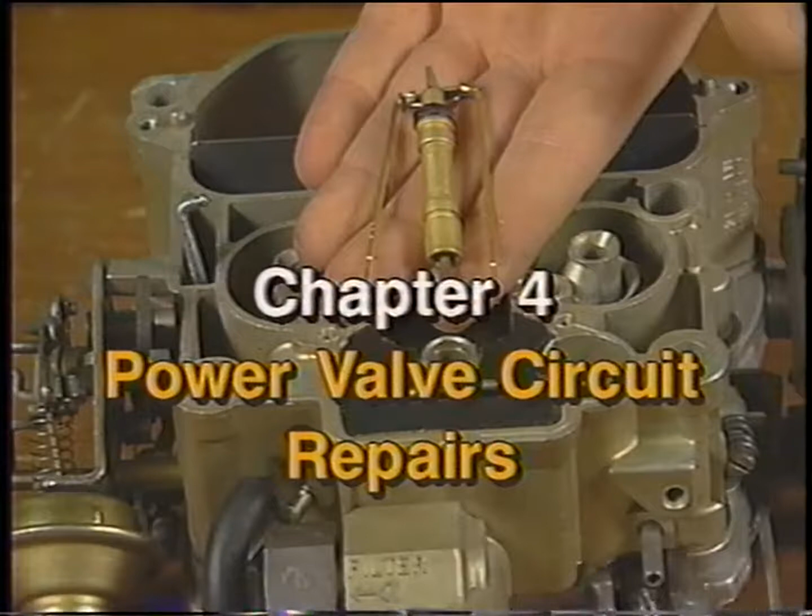Chapter 2 will begin our series of chapters that cover drivability or starting problems commonly encountered with carbureted engines, specifically choke pull-off testing and replacement. In Chapter 3, we'll look at inspecting the choke thermostat along with replacing and adjusting the two most common styles. Another carburetor part that can cause loss of power and fuel economy is the power valve circuit. Now during Chapter 4, we'll look at diagnosing power valve circuit failure and how to repair it.

In Chapter 5, we'll look at the carburetor circuit that allows you to take off from a stop sign, specifically the accelerator pump circuit. In the late 70s and early 80s, vehicle manufacturers began a decade of computerized carburetor controls, commonly referred to as feedback carburetors. The reason they were referred to that way is because they used a couple of sensors to feed information back to the onboard computer, and the onboard computer also controlled certain actuators contained in the carburetors.

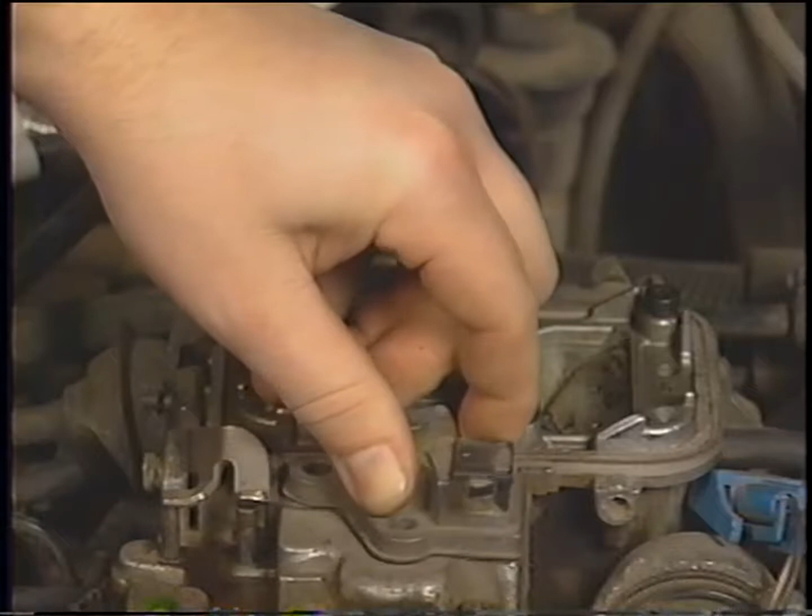One of the actuators used that was controlled by the onboard computer was the mixture control solenoid. In Chapters 6, 7, and 8, we'll explore testing, replacing, and adjusting mixture control solenoids. During Chapters 9 and 10, Jim Bates will join us to discuss testing and replacing throttle position sensors, which are common both to carbureted and fuel-injected vehicles.

The final chapter, in which we'll concentrate solely on carburetors, is Chapter 11, during which we'll completely disassemble a carburetor, rebuild it, and readjust it back to factory specifications. That pretty much wraps up the areas we'll be discussing on this tape, so now let's talk about the tools that we'll be using to perform the testing and replacement portions.

Now everybody pretty much realizes you'll need a good selection of basic hand tools to work on your vehicle. Some examples of that include combination wrenches, both metric and standard, a good selection of pliers including locking pliers and needle nose type, 1/4 inch drive and 3/8 drive shallow and deep well socket sets, again both metric and standard, a torque wrench, a hammer, some punches, and a rubber mallet, Phillips and flat blade screwdrivers,

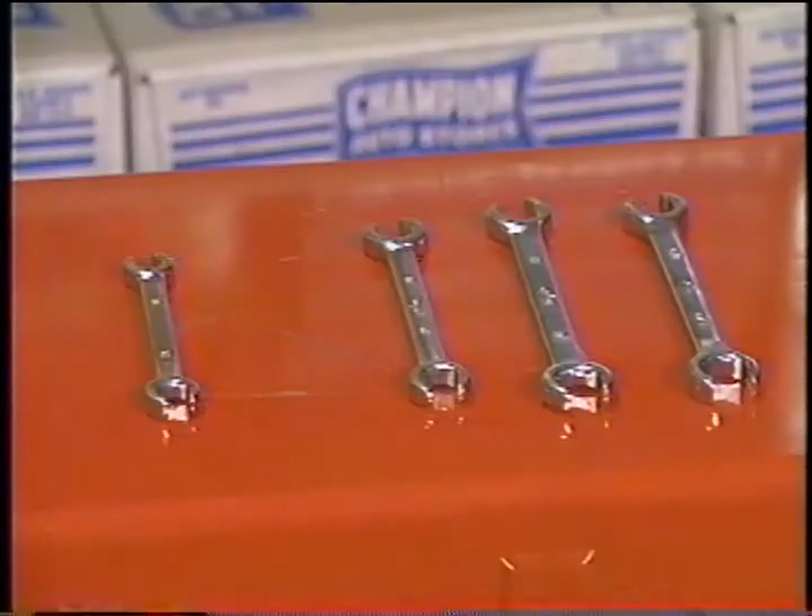one of my favorites, a magnetic screwdriver and a selection of bits, a pair of safety glasses, a set of metric and standard tubing wrenches, some shop towels and hand cleaner for cleaning up afterwards, and a drain pan, some funnels, and a gas can. You'll also need a few basic shop type chemicals, including thread lock adhesive, some carburetor parts cleaning solution, and a spray type carburetor cleaner.

Now let's look at some of the more specialized tools you may need. Torx bits are becoming a popular type of fastener for a lot of different items on today's vehicles. So you'll most likely need a set of Torx bits that I suggest you get from size 10 through size 50. For General Motors carbureted vehicles newer than 1980, you'll need some of these special tools for making fine-tuning adjustments either during a carburetor overhaul or even during an engine tune-up.

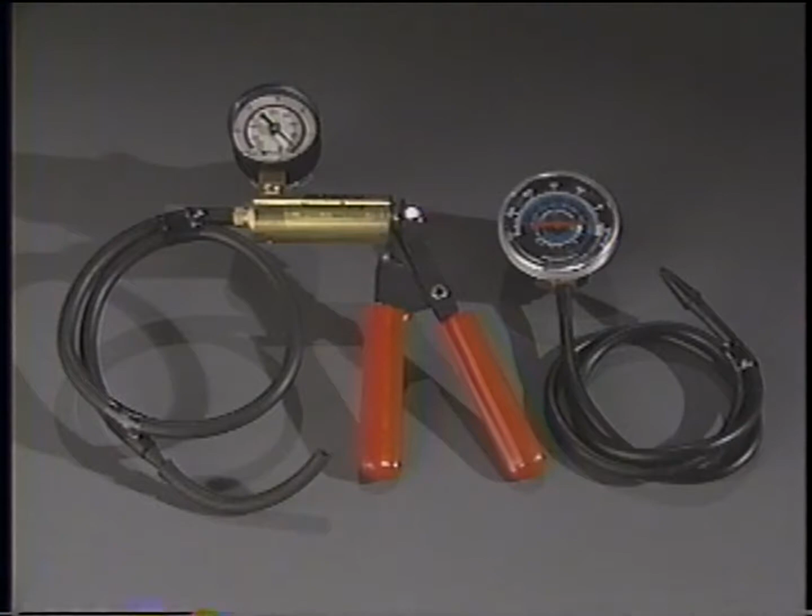Now another couple of common troubleshooting tools are a hand vacuum pump and a handheld vacuum pressure tester. We'll use those to check vacuum diaphragms and vacuum-related switches and relays. You'll also need a handheld digital volt ohm meter for testing the electrical circuits involved with your carburetor and a tach dwell meter for final carburetor adjustments. A digital multimeter like this one has all of those options built right into it. It's also a good idea to have around some jumper or test leads.

And one of the most important items any mechanic has to have is the correct service manual for the particular vehicle they're working on. One of the best you can buy is a Haynes manual, because they deal specifically with the disassembly and reassembly of your particular car. From specifications to detailed instructions and illustrations, you'll find just about everything you need to know about your vehicle in one of these. Well, that pretty much wraps up our tool selection.

Now the topics demonstrated on this tape are typical examples of carburetor repair procedures being performed on common vehicles.

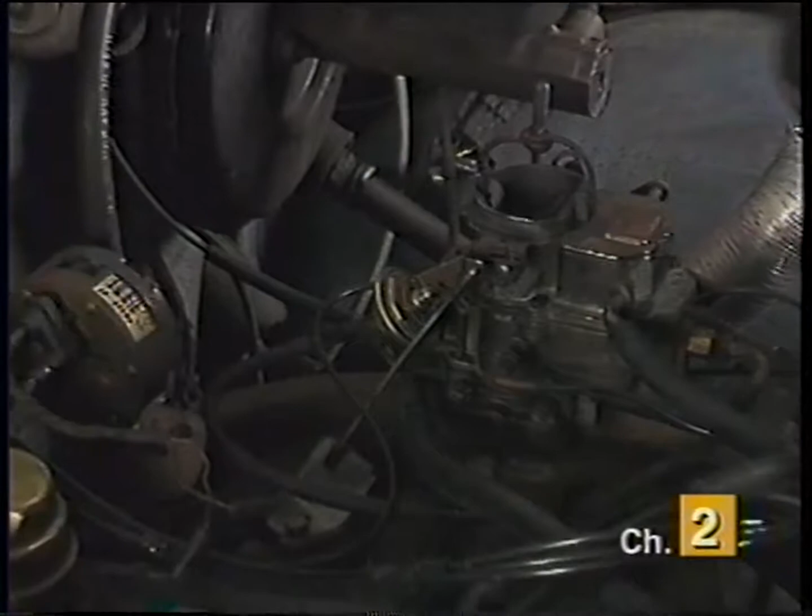They are located underneath the air cleaner, on the side of the carburetor, and are connected to the choke blade via linkage on one end, and on the other end there will be a vacuum hose attached. Its duty is to slightly open the choke blade on initial engine startup to prevent an over-rich fuel condition. Symptoms of a choke pull-off that has failed include an engine that starts and immediately stalls, rough engine operation right after initial startup, and black smoke from the tailpipe during cold engine operation.

On the other hand, a misadjusted choke pull-off, one that opens the choke blade too far after initial startup, would cause engine stalling when cold, and a hesitation on acceleration during the engine warm-up period.

If you suspect your choke pull-off is not working, the first step is to perform a visual inspection to make sure the vacuum hose is connected and in good condition, and to be sure the linkage between the pull-off and the choke blade are actually connected. If both areas appear all right, then start the engine and watch for movement of the pull-off. No movement indicates a defective pull-off.

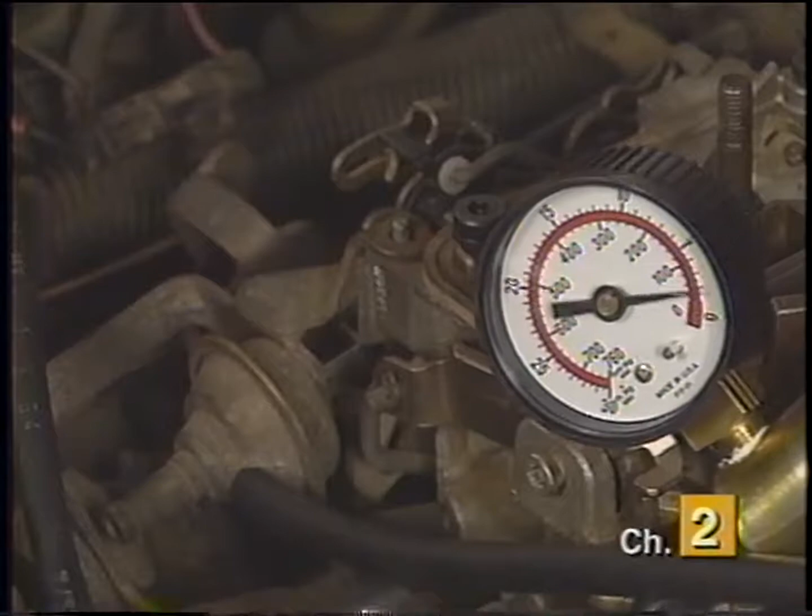Another method for testing and adjusting a choke pull-off is to use a handheld vacuum pump. Simply connect the hand vacuum pump to the choke pull-off and apply 20 inches of vacuum. Once again, the pull-off should move and hold vacuum. If the hand vacuum pump does not hold vacuum and the pull-off does not move, replace the pull-off. Some pull-offs have a small bleed hole on the backside that must be covered with a piece of tape or your finger during testing.

To replace your choke pull-off, you will need a magnetic screwdriver, a needle nose pliers, and a Haynes manual for your particular vehicle. First, you'll need to remove the air cleaner to access the pull-off. Make sure to mark or note the location of any hose connections that lead to it before disconnecting them. Next, remove the mounting screws from the old pull-off. This is when the magnetic screwdriver comes in handy.

Carefully remove the pull-off while disconnecting it from the linkage. Take your time so as not to disturb or bend any linkages during removal. Many choke pull-offs have a bracket that must be transferred to the new part. Remove the pull-off from the bracket if so equipped. When purchasing a new choke pull-off, it is often a good idea to have the serial number from the carburetor or the old one along with you. Compare the old and new pull-off to be sure of correct replacement.

If the old pull-off was earlier removed from a bracket, install the new pull-off to the old bracket. Install the new one in reverse order of removal by carefully connecting the linkage and reinstalling the mounting screws. Tighten the mounting screws securely. Lastly, make sure you check the adjustment once it is installed.

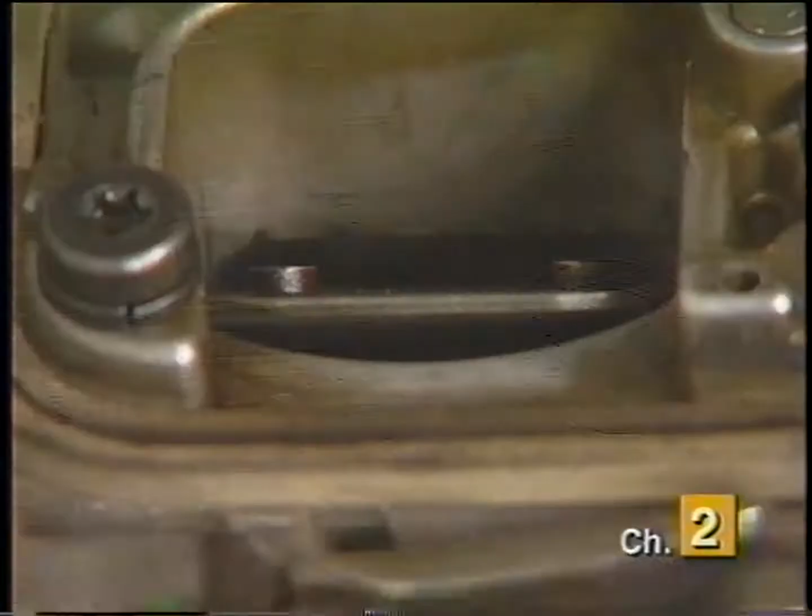To do so, connect up a hand vacuum pump, and with light finger pressure on the choke blade, apply vacuum to the choke pull-off. With a drill bit of the appropriate size, measure the opening distance between the choke blade and housing. Generally, there should be between 1/8 and 3/16 of an inch gap. But make sure you check a Haynes manual for the correct specification on your vehicle.

If it is not within specifications, reset it by turning the adjustment screw or by putting a slight bend in the linkage. Reinstall the air cleaner and reconnect any hoses removed earlier. Once adjusted, start the engine to be sure of proper operation.

Now let's briefly recap the steps for testing and replacing a choke pull-off. First, remove the air cleaner and inspect the vacuum hose and connecting linkages. If damage or deterioration is found, perform necessary repairs before continuing. Then start the engine or connect a hand vacuum pump and apply 20 inches of vacuum. Watch for movement of the diaphragm. If no movement is noticed, replace it. If you're performing the test with a hand vacuum pump, check for a bleed hole that may have to be covered during the procedure.

To replace a choke pull-off, disconnect the vacuum hose and remove the mounting screws. Carefully disconnect the linkage while removing the pull-off from the carburetor. Compare the old and new parts to be sure of proper replacement. In some cases, you may have to change a bracket from the old one to the new one. Position the new pull-off onto the carburetor while carefully reconnecting the linkage to it. Reinstall and tighten the mounting screws and vacuum line. Check and adjust the pull-off as per the instructions detailed in a Haynes manual.

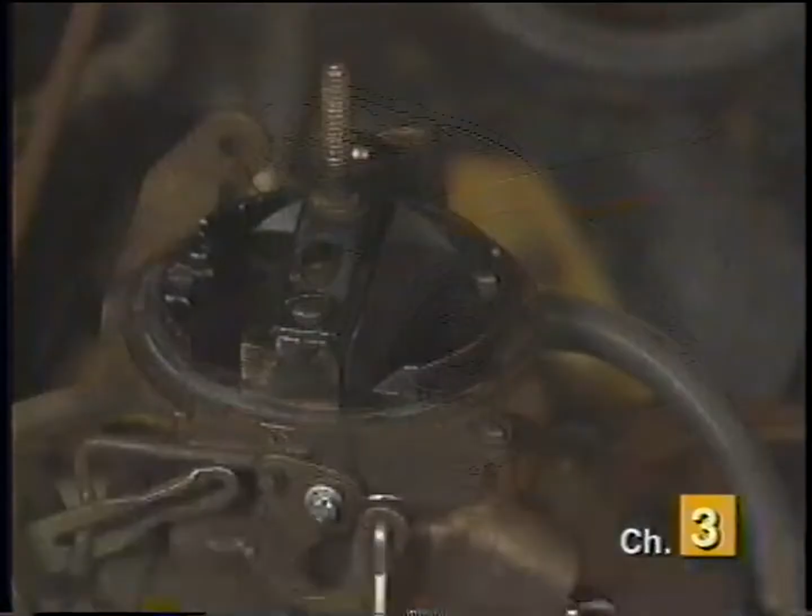Choke thermostats can fail in two different manners. The most common manner is when the bimetal spring inside the thermostat becomes weak and will not totally close the choke blade during cold weather. Symptoms of this type of failure include hard starting when cold, or engine stumbles or stalls upon acceleration during the engine warm-up period.

The other manner in which a choke thermostat can fail is when it fails to totally open the choke after the engine is fully warm. This can cause sluggish engine performance, poor fuel economy, black smoke out the tailpipe, or even failure to pass a state emissions test.

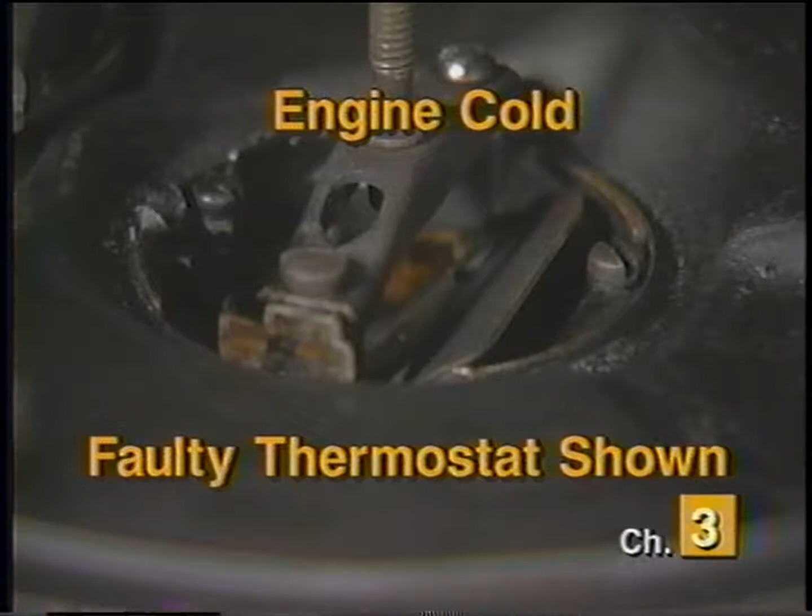To check your choke thermostat, remove the air cleaner and snap the throttle. If the outside air temperature is less than 50 degrees and the engine has not been run in the last 5 or more hours, the choke blade should snap all the way closed.

The other test requires you to run the engine until it is at full operating temperature. This will usually take about 10 minutes or 5 to 8 miles of highway driving. With the engine shut off and the air filter cover removed, check to make sure the choke blade is totally open.

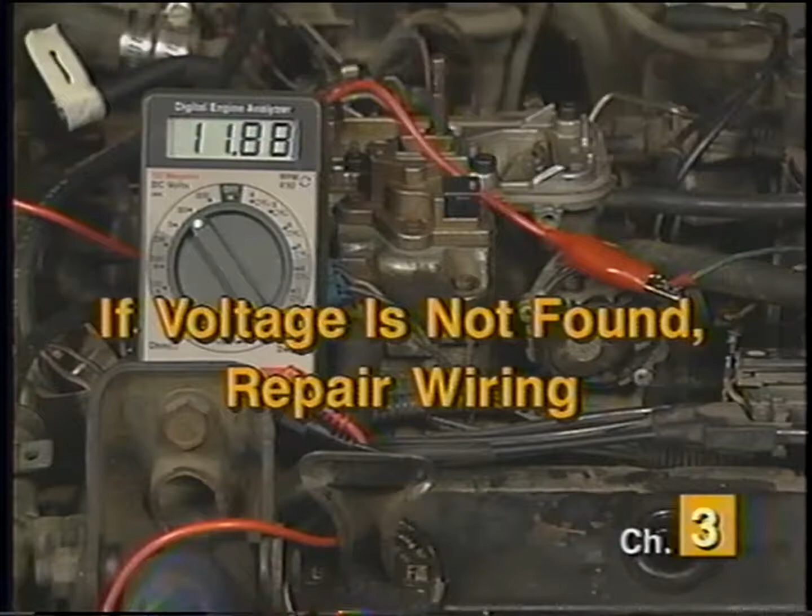If yours is electrically assisted, test to make sure you have power at the electrical connector. With the ignition key in the run position and with the engine cold, disconnect the electrical connector at the thermostat and in its place, connect a voltmeter. Most vehicles require 8 volts or above for proper choke thermostat operation. If voltage is not present at this wire, check for open circuits and repair the electrical wiring before replacing the choke thermostat.

The items you may need to replace your choke thermostat include a Phillips or large flat blade screwdriver, a needle nose pliers, a 3/8 drive socket set, and a Haynes manual for your particular vehicle. In most cases, you will have to remove the air cleaner to gain access to the choke thermostat.

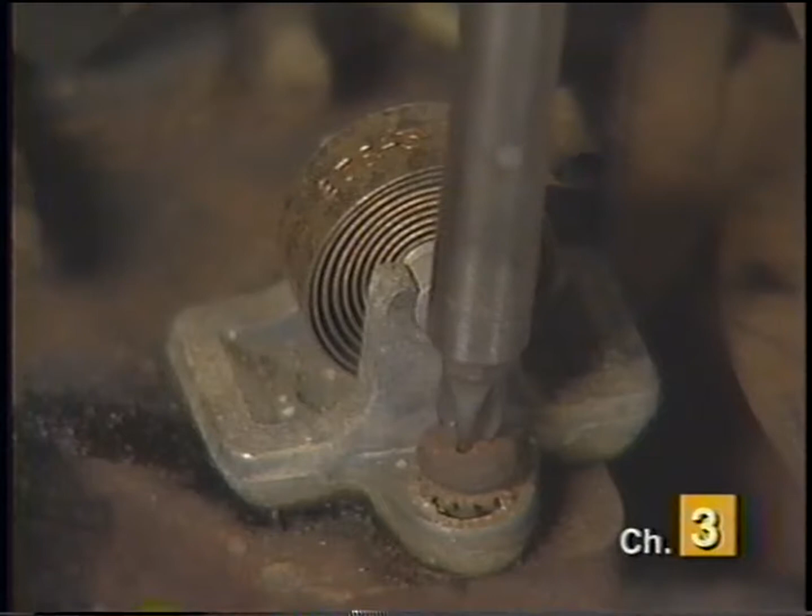To replace a divorced choke, first disconnect the linkage rod from the carburetor. Now remove the choke thermostat cover or stove if so equipped, and remove the linkage rod from the thermostat. Remove the mounting screw or bolt and remove the choke thermostat from its mounting position. Compare the new and old thermostats to be sure of proper replacement.

Set the new thermostat in position and start the bolt by hand to prevent cross-threading. Tighten the bolt securely once installed. Reattach the linkage rod to the choke thermostat and reinstall the thermostat cover or stove. Reconnect the linkage to the carburetor and reinstall the linkage clip. Move the throttle and check to make sure there isn't any interference or binding of linkages. Reinstall the air cleaner housing and you're done.

To replace an integral style choke, once again you will have to remove the air cleaner assembly. Note the routing and attachment points of any hoses connected to the air cleaner. Place a small mark on the graduated scale of the choke housing as to the position of the thermostat you are removing. If so equipped, disconnect the electrical connection from the terminal on the outside of the choke.

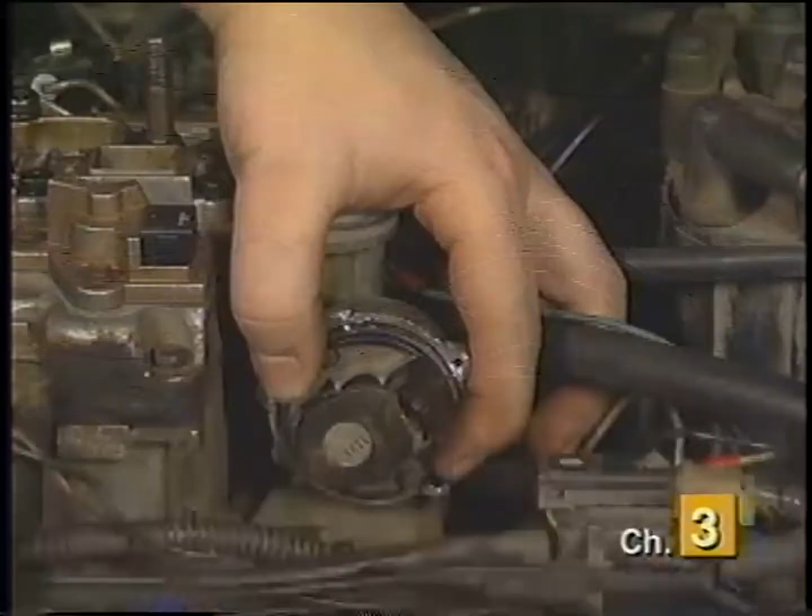Remove the small screws that secure the choke thermostat in place. Be careful not to drop or lose the small retaining clips. A magnetic screwdriver comes in handy if they are metal screws and clips. With the screws removed, you can grasp, twist, and remove the thermostat from the carburetor. Once again, compare the new and old thermostat to be sure of correct installation.

Position the new choke thermostat on the housing, making sure to engage the tab on the thermostat with the notch in the choke linkage. Once positioned, move the thermostat back and forth several times while watching the choke blade. If correctly installed, the choke blade should move freely along with the movement of the thermostat. Then, reinstall the retaining screws and ring or clips and gently snug them up. Don't fully tighten them at this point.

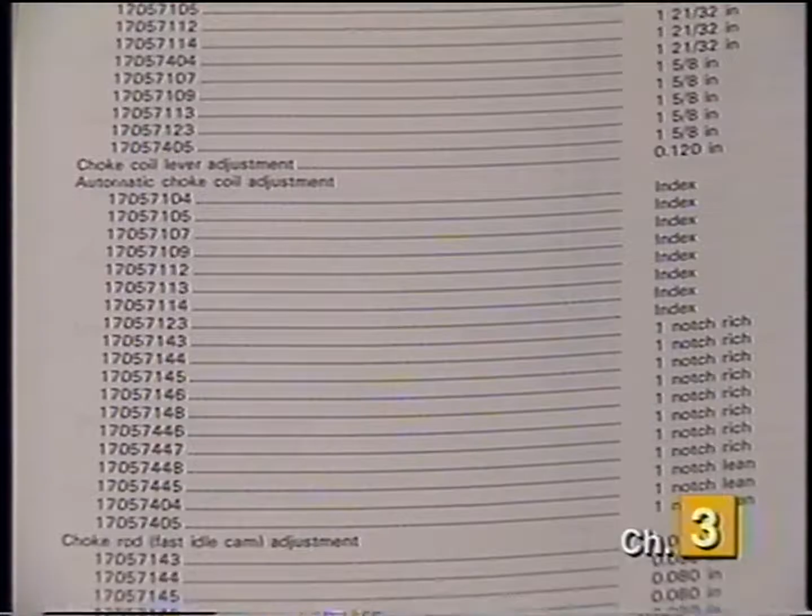Consult a Haynes manual for the correct adjustment specification on your vehicle. Adjust the line on the thermostat to the correct position on the scale of the choke housing. Once adjusted, fully tighten the retaining screws. Then, reconnect the electrical connector to the thermostat. Reinstall the air cleaner, and start the vehicle to test the choke for proper operation.

Let's recap the steps involved for testing and replacing your choke thermostat. To test your choke thermostat for correct cold operation, the engine must not have been run for about 5 hours, and the outside temperature must be less than 50 degrees. Remove the air cleaner cover and snap the throttle. The choke plate should fully close. If not, replace the choke thermostat.

The other test requires you to run the engine until it is at full operating temperature. Shut the engine off and once again remove the air cleaner cover. The choke blade at the top of the air horn should be fully open. If your choke thermostat is electrically assisted, check for voltage at the feed wire with the ignition switch in the run position. Most vehicles require 8 volts or above at the wire for this proper operation. If voltage is not present at this wire, repair the electrical circuit before replacing the choke thermostat.

To replace your choke thermostat, in most cases you will have to remove the air cleaner. On divorced chokes, remove the choke stove if so equipped, and remove the mounting screw or bolt that attaches the thermostat to the manifold. Then remove the linkage from where it attaches to the carburetor. Compare the new and old units to be sure of the correct replacement.

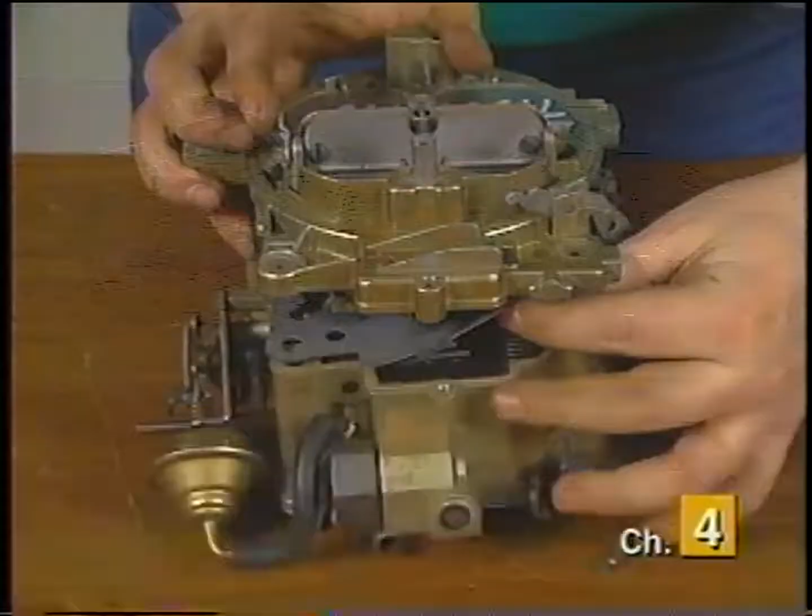To cure this problem, you must remove the air horn from the carburetor. Remove the air horn gasket and pop the power piston and metering rods up and out of their position. Be sure not to disturb or lose the small spring that sits below the power valve piston. Clean the outside of the power piston and metering rods with carburetor cleaner to remove varnish. Also, be sure to clean the piston well at the same time.

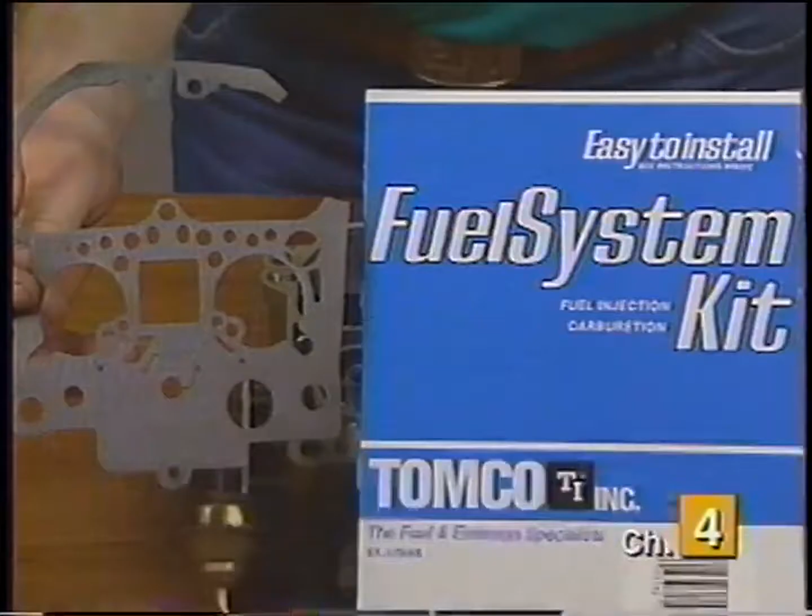Since partial carb disassembly is required to access this style of power piston, and internal varnish deposits have been found, we suggest rebuilding the carburetor at this time. You will also probably damage the air horn gasket, which can only be purchased in a complete carburetor kit. For a complete demonstration of those procedures, view our chapter on carburetor rebuilding.

On Ford and Holley carburetors that utilize a diaphragm type of power valve, failure symptoms would include poor fuel economy, sluggish engine performance due to a rich fuel mixture, and even black smoke out the tailpipe. A power valve failure of this type can often be attributed to an engine backfire. This style can be replaced without complete disassembly of the carburetor. On many Holley carburetors, the power valve is located inside the fuel bowl in the main metering block.

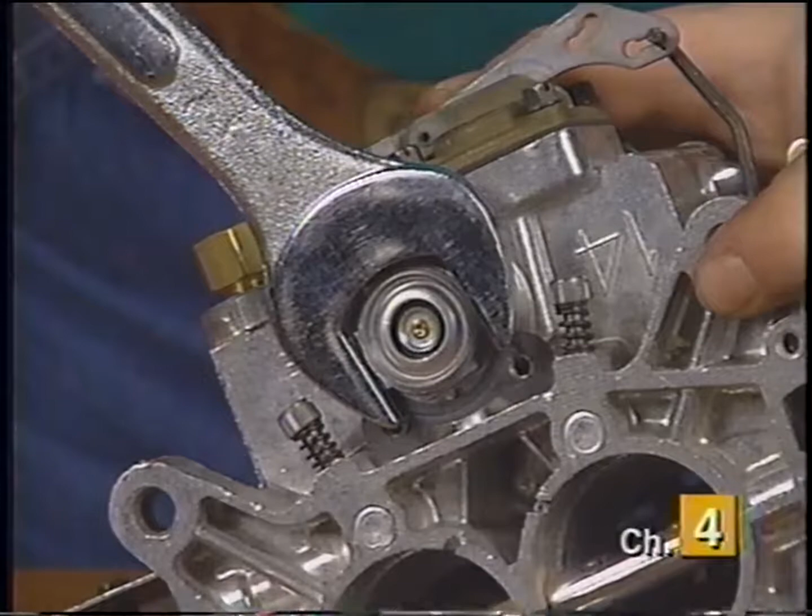On Ford vehicles, where carburetor removal is necessary, invert the carb over a funnel and gas can to drain the fuel out of it before disassembly. Then locate and remove the screws retaining the power valve cover. Fuel deposits inside the cover are an indication of a power valve diaphragm rupture. With the cover removed, you can use a large, about 1-inch wrench to loosen and remove the power valve.

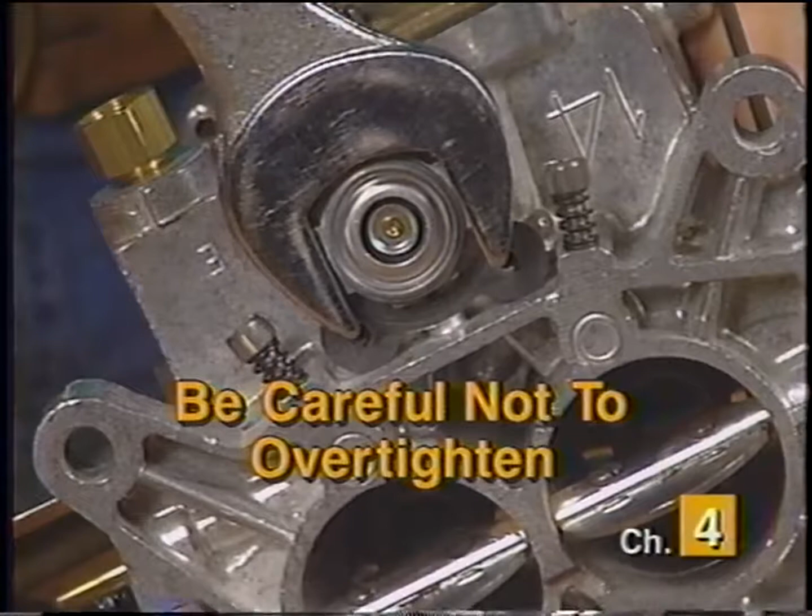Compare the new and old power valves to be sure of correct replacement. On Holley Performance carburetors, there will be a small 2- or 3-digit number stamped into the hex of the power valve. Make sure the number on the old one matches the number stamped into the new one. Position the new gasket on the new power valve and start it in the threads by hand to prevent cross-threading. Snug the power valve in place with the wrench, but be careful not to over-tighten it, as it is quite easy to do with a wrench that large.

Then reposition the power valve cover and install the cover retaining screws. Snug them up with a screwdriver once all of them have been started in the threads. Reinstall the carburetor on the vehicle and test drive to be sure of correct diagnosis.

Now let's review servicing or replacing the power valve. Servicing your power valve system, if it utilizes a power piston and metering rods, commonly found on Rochester, Carter, and many import applications, requires you to partially disassemble the carburetor. Because damage to some of the gaskets will occur during this procedure that can only be obtained in a carburetor overhaul kit, we suggest rebuilding the carb at this time.

With the power piston and metering rods removed, clean any varnish or deposits from them, as well as the piston well inside the carburetor. Once clean, reinstall the power piston and check for free operation. Reassemble the carb in the reverse order of disassembly, making sure to replace any gaskets that may have been damaged.

On many Ford and Holley carburetors, a diaphragm type of power valve is used and can be replaced without complete carburetor disassembly. On the Holley type, the float bowl will have to be removed, and on the Ford type, a small cover and 4 retaining screws will have to be removed. Use an appropriate wrench on the hex part of the power valve to remove it.

Install the new power valve and gasket, being careful not to over-tighten it with the large wrench. Reinstall the float bowl or cover and tighten the screws appropriately. Start the vehicle and test drive it for proper operation.

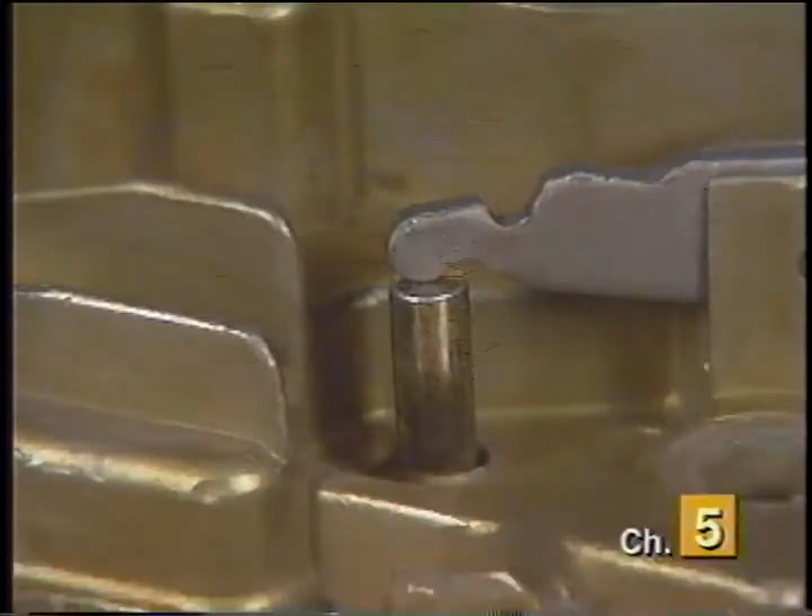The accelerator pump circuit in your carburetor adds an extra shot of fuel each time you step on the gas pedal to bridge the fuel delivery gap between idle and cruising RPMs. The accelerator pump itself is located internally or externally on the carburetor and is operated via linkage connected to the throttle plates.

Symptoms of a failing accelerator pump include a hesitation during acceleration from a stop sign after the engine is fully warmed up, a hesitation during acceleration when attempting to enter a freeway or while passing another vehicle, or even an external gas leak near the carburetor.

Before condemning the accelerator pump as your problem, make sure the entire ignition system, spark plugs, distributor cap and rotor, and spark plug wires are all in good operating condition, and check the ignition timing to be sure it is adjusted to the correct specification. If the engine is in good tune, you may then consider replacing the accelerator pump.

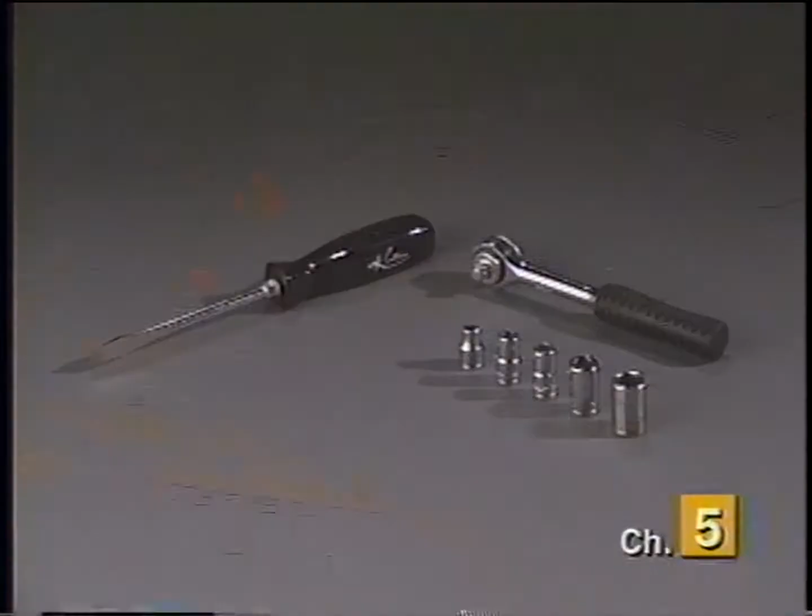The only tools you will need to replace an externally mounted accelerator pump is a screwdriver or 1/4-inch drive socket set. Externally mounted accelerator pumps are commonly found on Ford and Holley carburetors. To replace this style of accelerator pump, you may or may not have to remove the carburetor from the vehicle. For our demonstration, we chose to have the carburetor already removed.

First, if you are going to completely remove the pump cover and the accelerator pump linkage has more than one possible position, mark its location before disconnecting the linkage. Remove the 4 screws retaining the accelerator pump cover to the carburetor and position the cover aside and out of your way. Then, with the aid of a screwdriver, remove the old accelerator pump diaphragm and spring.

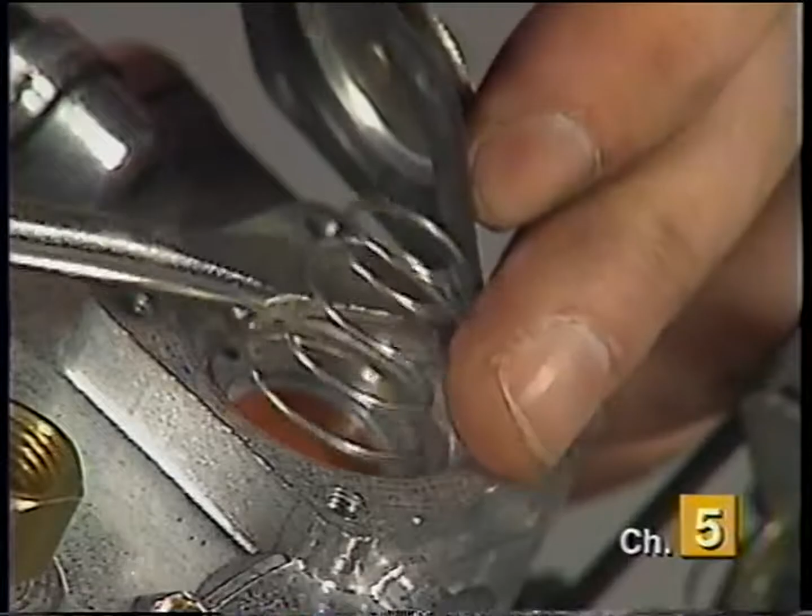If it is equipped with a rubber pump check valve, inspect it for damage, as a pump check valve can create similar drivability problems as would a bad pump diaphragm. If check valve damage is noticed, you will have to rebuild the entire carburetor, as that is the only way to purchase this item. If the check valve appears okay, reinstall the new pump and spring.

Be sure the pump is positioned in the same direction as the old one was removed from. Reconnect the linkage to the pump cover and start all pump cover screws by hand to avoid cross-threading. Tighten all the mounting screws securely.

On Rochester, Carter, and other styles of carburetors with internal accelerator pumps, you must partially disassemble the carburetor to access the pump. During disassembly, you will most likely damage some of the gaskets, so you will need to purchase a carburetor overhaul kit to obtain the accelerator pump cup and gaskets necessary. For a complete demonstration of carburetor removal and rebuilding procedures, review our video chapter on carburetor rebuilding.

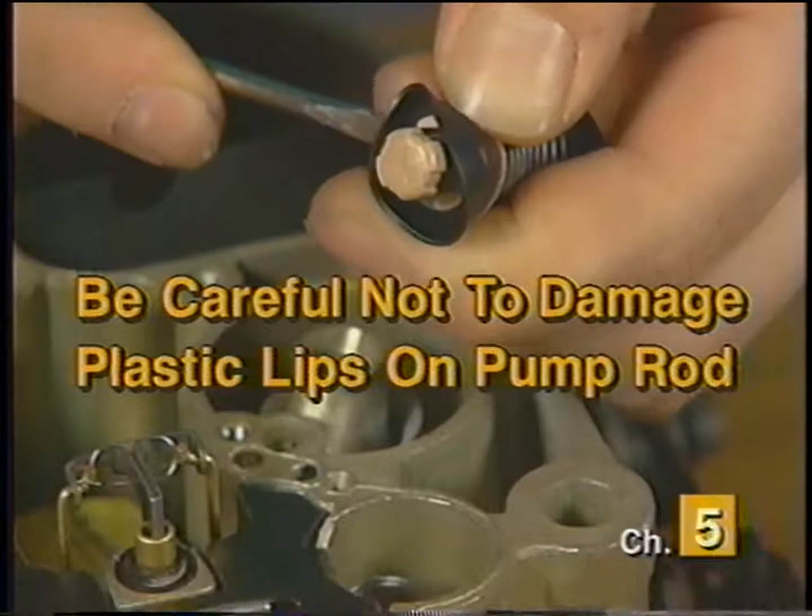The actual accelerator pump is a small rubber cup that is mounted onto the accelerator pump shaft. With the spring removed, you can work the rubber cup off from the shaft. Use care when removing the cup from the old shaft, as the plastic lips that hold the cup in position are quite fragile. Reposition the new cup in the same direction as the old one. That's all it takes to replace your accelerator pump.

Now let's review the steps for replacing your accelerator pump. On some Ford and Holley carburetors, the accelerator pump is located on the outside of the float bowl, and disassembly of the carburetor is not necessary. Simply remove the 4 screws retaining the accelerator pump cover and remove the pump and cover from the float bowl. Position the new pump on the cover in the same direction as the old one, position the accelerator pump spring, and reinstall the cover and retaining screws.

On Rochester, Carter, and many import carburetors, replacing the accelerator pump will require partial carburetor disassembly. Because damage to some of the gaskets may occur during the process, we suggest obtaining a carburetor kit and replace gaskets as needed. Once the carburetor is partially disassembled, you can remove the accelerator pump and plunger from the pump well. With a small screwdriver, remove the accelerator pump cup from the plunger.

Some will have a clip and spring that will have to be removed, while others will be held in place with a round garter spring. Install the new pump cup in the same direction as the old one. Reinstall the accelerator pump in the pump well, and reassemble the carburetor in the reverse order of disassembly.

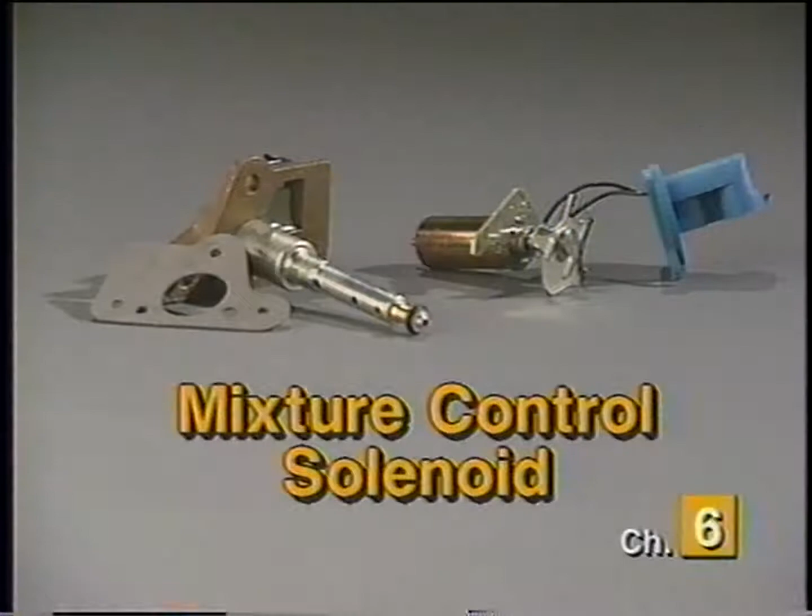The mixture control solenoid is an electrical device used on computerized carbureted vehicles that controls fuel flow from the main bowl of the carburetor to the main well, along with controlling an idle air bleed circuit. Symptoms of a failing mixture control solenoid would include a sudden drop in fuel economy or hesitation on acceleration. To test a mixture control solenoid, you will need a small, flat-bladed screwdriver, a hand vacuum pump, a jumper lead, and a digital volt-ohmmeter. To prevent burns, always start with a cool engine.

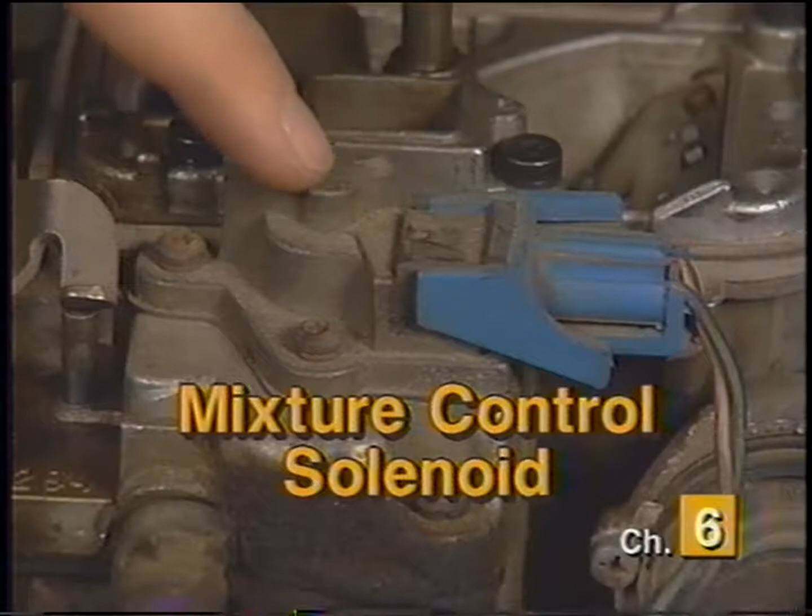Label and disconnect any hoses attached to the air cleaner assembly and remove the air cleaner from the engine. The mixture control solenoid will be located inside the carburetor. During our demonstration, we will be working on a General Motors vehicle. The first test is to simply listen for the MC solenoid to cycle. Turn the ignition switch to the run position. On many models, you should begin to hear a clicking sound as the mixture control solenoid cycles. If a clicking noise is heard, the electrical part of the solenoid is okay.

If no sound is heard, turn the ignition switch off. Ground the diagnostic terminals of the ALDL connector. For a complete demonstration of grounding the ALDL connector, refer to our onboard computer troubleshooting tape. Once again, turn the ignition switch to the run position. The solenoid should begin cycling. If no clicking is heard from the solenoid, replace it.

Next, use a small flat-bladed screwdriver to release the lock tab and disconnect the electrical connector from the solenoid. Connect the leads of your ohmmeter to the terminals of the MC solenoid. Polarity is not important. Set the ohmmeter to the low ohm scale. You should see a reading between 20 and 50 ohms. If the reading is within specifications, the problem is most likely in the wiring harness or the computer itself. If the reading is not within specifications, replace the MC solenoid.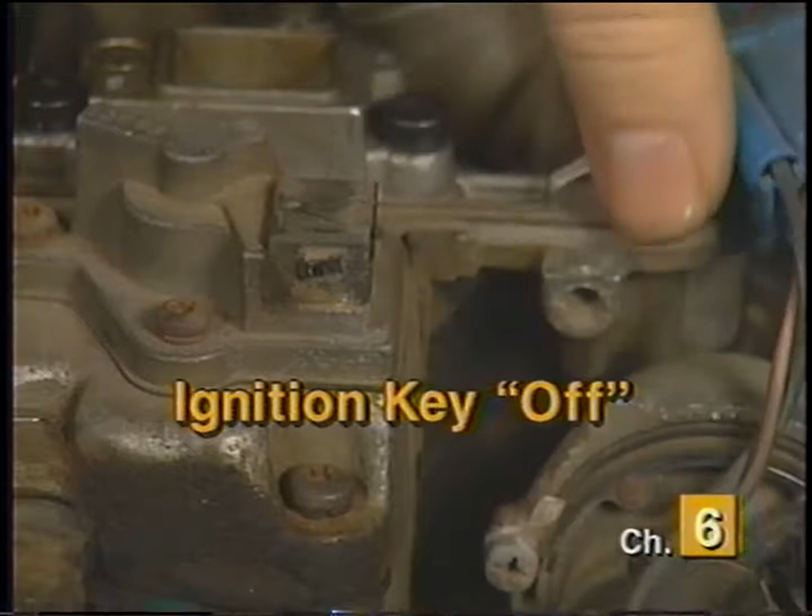If you have a General Motors vehicle with an externally removable MC solenoid, as shown, there is an additional test that can be performed. With the ignition key off, disconnect the electrical connection from the MC solenoid. Remove the solenoid from the carburetor and inspect the seals for damage. Replace any seals that are swollen or damaged. Reconnect the electrical connector to the solenoid. Connect a hand vacuum pump to the end of the solenoid with a piece of vacuum hose that will fit snugly over the rubber seal or stem.

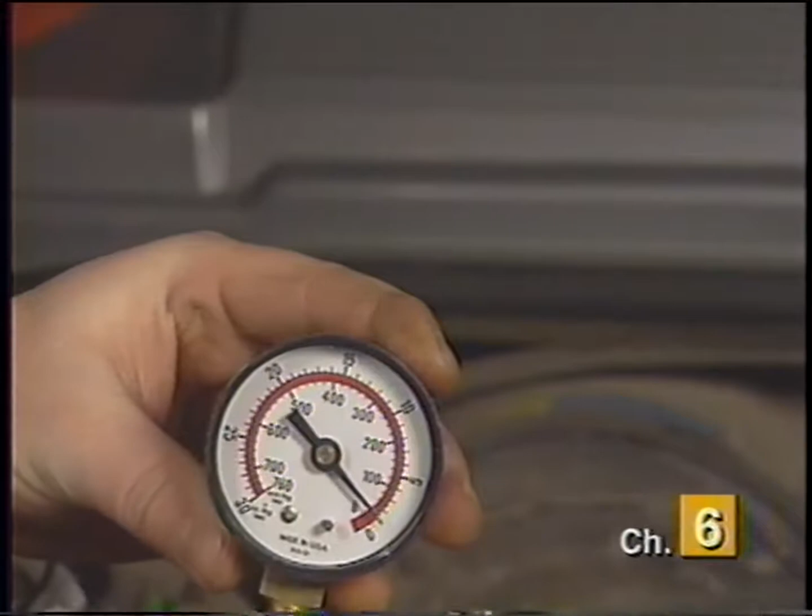Using a test lead, ground the Kelly green connector. This is the terminal normally used to check MC solenoid dwell. Turn the ignition switch to the run position, but do not start the engine. This will energize the solenoid in the lean position. With the hand vacuum pump, apply 5 inches of vacuum to the solenoid. The vacuum should hold for at least 5 seconds. If it will not hold vacuum, as in our demonstration, replace the solenoid. If it will hold 5 inches of vacuum for 5 seconds, that part of the solenoid is okay.

Then, disconnect the ground lead from the Kelly green connector. The vacuum gauge reading should go to 0 instantly. If it does not, replace the solenoid. To test it for restrictions, apply a rapid hand vacuum pump action several times. Wait a couple of seconds in between strokes. The gauge should move slightly, then return to 0 before the next rapid stroke. If the gauge does not return to 0 between these rapid strokes, the fuel feed orifice is restricted and the solenoid should be replaced.

The mixture control solenoid is the electrical equivalent to the power valve circuit on non-feedback carburetors. Let's recap the testing procedures just performed. First, ground the ALDL connector and turn the ignition key to the run position. Listen for the MC solenoid to begin cycling. If no sound is heard, test the winding resistance of the solenoid with an ohm meter.

Set the meter to the low ohm scale, and with the electrical junction disconnected, the resistance between the two terminals of the solenoid should fall between 20 and 50 ohms. If not, replace it. If it is an externally accessible solenoid, you can remove it from the carburetor and visually inspect it for damaged seals.

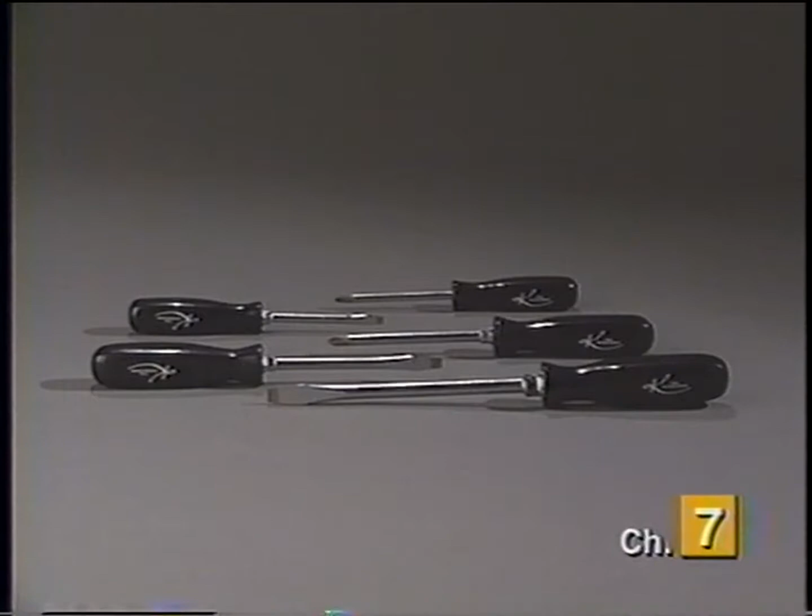To install an externally mounted solenoid, the tools you will need include a set of screwdrivers and the correct MC solenoid and gasket for your vehicle. To prevent burns, always start repairs on a cool engine. Because gasoline and gas vapor is very flammable, there are some important precautions to remember when working on the fuel system. Always work in a well-ventilated area.

Do not smoke while doing fuel system repairs. Keep open flames, sparks, or bare bulbs away from the work area. Do not work in an area with a gas appliance equipped with a pilot light. And have a fire extinguisher of the proper rating close at hand. First, make sure all accessories, including the ignition key, are turned off. Label and remove any hose connections to the air filter housing, and remove the air filter housing from the engine.

Now, locate the mixture control solenoid on top of the carburetor. Unplug the 2-wire harness from the solenoid. A small, flat blade screwdriver may be useful to release the locking tabs. Remove the screws attaching the solenoid to the carburetor, and remove the MC solenoid by pulling up with a slight twisting motion. Compare the old solenoid to the new one to ensure proper replacement.

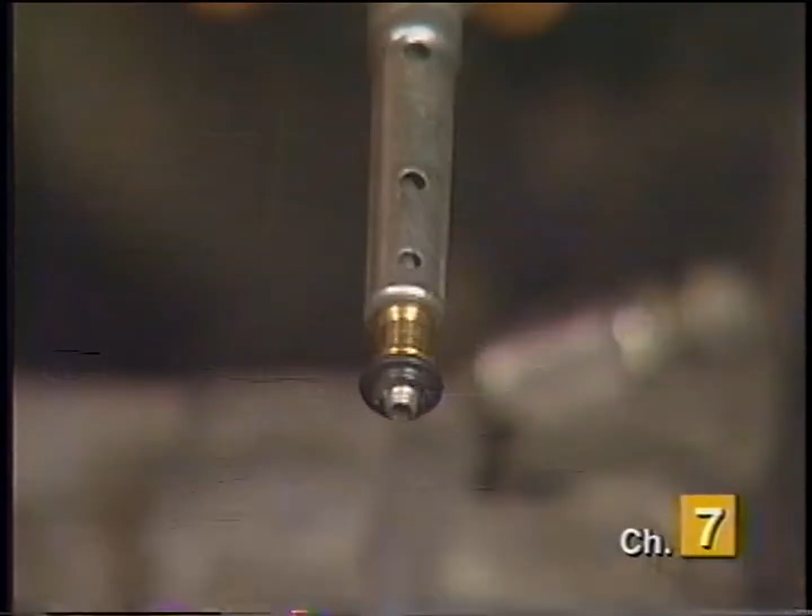If the old gasket is still on the carburetor, remove it, making sure the mounting surface is clean. Then, position the new gasket on the carburetor. Put a small dab of clean engine oil on the rubber O-ring at the bottom of the new MC solenoid. This will allow it to slip into place easier and help prevent damage to the O-ring. Now, carefully install the MC solenoid by pressing down with a slight twisting motion to help the O-ring slip into place.

Reinstall the mounting screws and reattach the wire harness. Reinstall the air cleaner assembly and reconnect any hoses or wires earlier removed. Test drive the vehicle for proper operation and you are done.

To replace an externally mounted mixture control solenoid on a GM vehicle, first turn off all the accessories including the ignition key. Remove the air cleaner. Unplug the 2-wire harness from the solenoid. Remove the mounting screws and remove the solenoid from the carburetor by gently pulling up with a slight twisting motion. Compare the new and old solenoids to be sure of correct replacement.

Place a dab of clean engine oil on the O-rings of the new solenoid. Now carefully install the new solenoid in the carburetor using downward pressure and a slight twisting motion. Reinstall the mounting screws and tighten to the proper torque specifications. Reattach the wiring harness. Reinstall the air cleaner and reconnect any hoses disconnected earlier. Lastly, test drive the vehicle for correct operation.

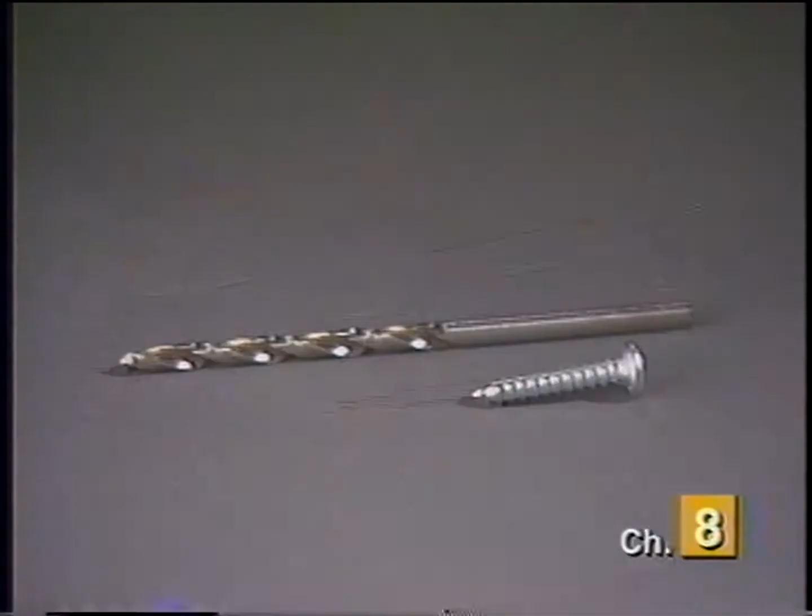To install and adjust an internally mounted mixture control solenoid on a General Motors carburetor, you will need a magnetic screwdriver and assorted bits, a digital volt ohm meter, a carburetor gauge set, a mixture control adjusting tool, an idle mixture adjusting tool, an idle mixture seal plug removal tool, a small pin punch and a ball peen hammer, a 1/8 inch drill bit, a number 8 sheet metal screw, a pair of locking pliers, the appropriate carburetor gasket set, a small tube of thread locking compound, and the correct mixture control solenoid for your application.

To prevent burns, always begin repairs on a cool engine. Because gasoline and gas vapors are extremely flammable, there are some important precautions to remember whenever working on any part of the fuel system.

Do not work in an area with a gas heater equipped with a pilot light without having adequate ventilation. Even if there isn't a gas heater with a pilot light, still make sure to work in a well-ventilated area. Don't smoke when performing fuel system repairs. Keep open flames, sparks, and unprotected light bulbs away from the immediate work area. And most importantly, have a fire extinguisher close at hand.

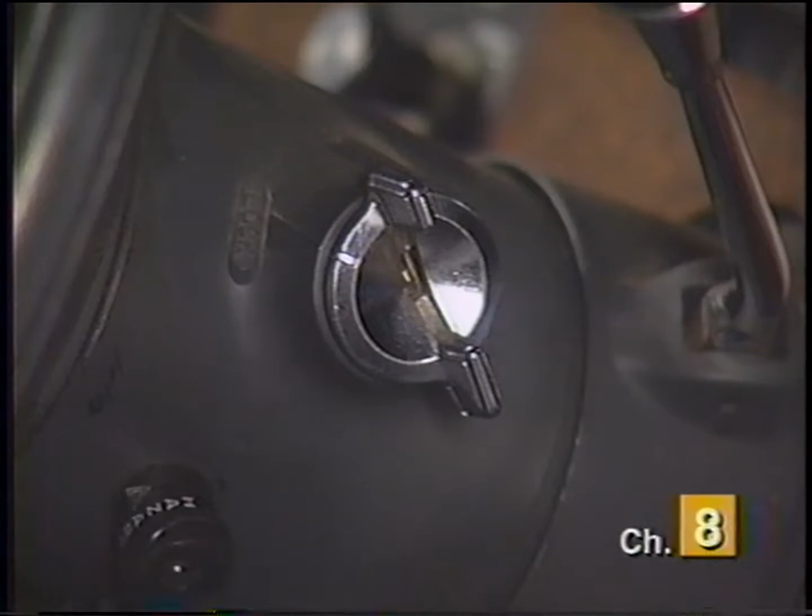Begin by making sure all accessories, including the ignition key, are turned off. Label and remove any hoses or wires attached to the air cleaner housing. Remove the air cleaner from the carburetor. For our demonstration, the carburetor will be off from the engine during the replacement. For complete details on carburetor removal procedures, refer to our video segment on carburetor rebuilding.

Remove the upper choke lever from the end of the shaft by removing the retaining screw and rotating the lever. Then remove the choke rod from the lower lever inside the float bowl casting by holding the lever outward and twisting the choke rod counterclockwise. Use a small pin punch to drive the accelerator pump lever pivot pin inward until the lever can be removed from the air horn. Set the lever aside and out of your way.

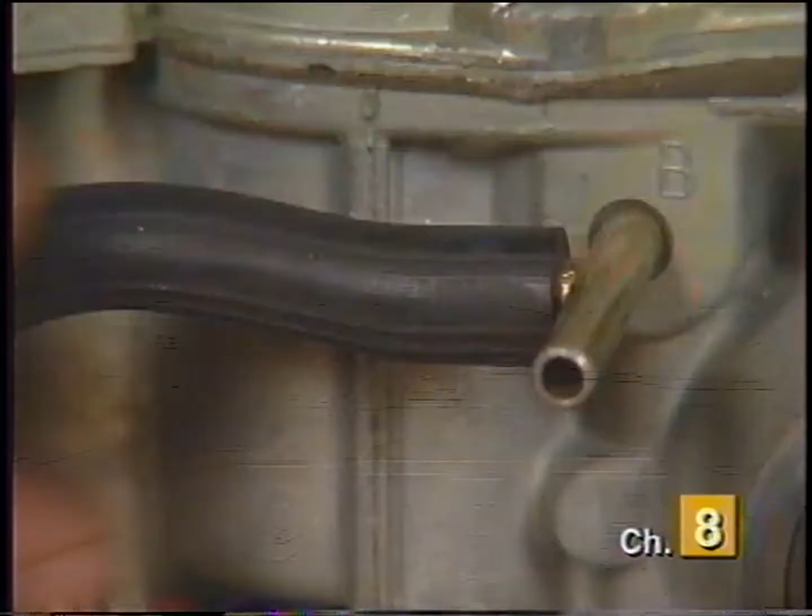Next, remove the vacuum break hose from the tube on the float bowl. Remove the air horn attaching screws, and don't forget the 2 countersunk screws inside the throat of the carburetor. A magnetic screwdriver can be used to prevent dropping the screws. Carefully remove the throttle position sensor plunger. Do not lose or misplace this item. After all the attaching screws are removed, lift the air horn straight up and off from the float bowl.

On our carburetor, the accelerator pump plunger, MC solenoid plunger, and air horn gasket remained attached to the air horn itself. If the air horn gasket is damaged during the procedure, a new one can be obtained in a carburetor rebuilding kit. Remove the plastic filler block from over the float valve. Carefully lift out each metering rod assembly along with its return spring.

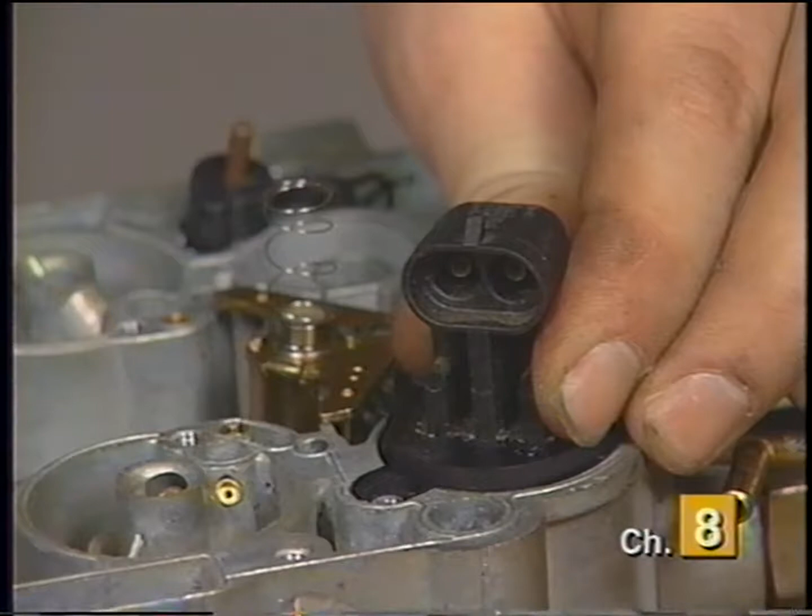Next, using the lean stop adjustment tool, turn the lean stop screw all of the way in while counting the number of turns. Record the number of turns and then remove it from the float bowl. Next, remove the screw retaining the MC solenoid electrical connector. Now you can carefully lift the mixture control solenoid and its connector assembly from the float bowl. Compare the old solenoid to the new one to ensure proper replacement.

Carefully set the new solenoid and wire into place. Be sure the bottom of the solenoid sits properly on the large spring in the bottom of the float bowl. Then reinstall the screw that secures the electrical connector on the carburetor. Now, reposition the lean mixture stop. Once again, set it to the same number of turns as it was positioned to earlier. Now reinstall the metering rods and springs.

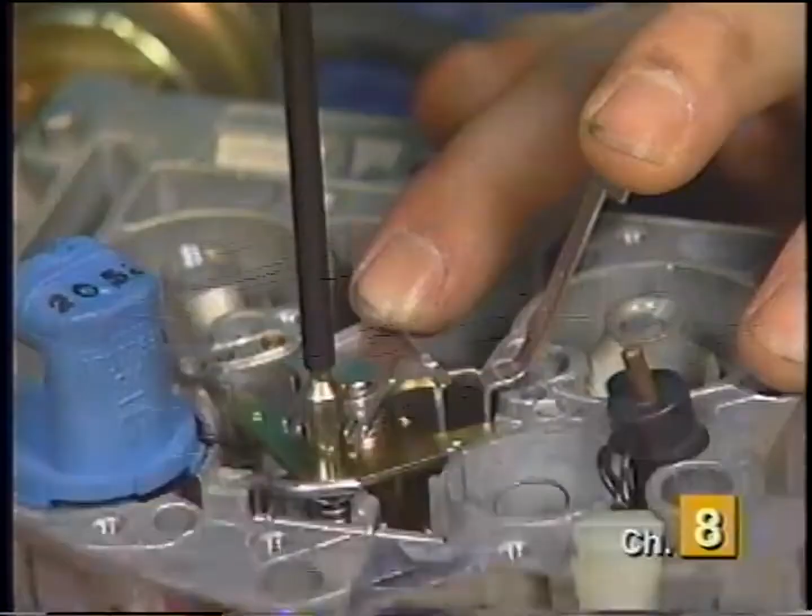Insert the lean limiting adjustment tool from the gauge kit into the hole next to the metering rod and down to the base of the metering jet. Next, insert and hold the MC solenoid plunger lightly down against its stop. Using the mixture control adjusting tool, turn the lean mixture screw counterclockwise until the plunger does not touch the gauge. Then, turn the screw clockwise until the plunger just touches the gauge. Once adjusted, remove the mixture control solenoid plunger. Now you can remove the gauge and reinstall the plastic filler block over the float valve.

We suggest always installing a new air horn gasket from a carburetor kit to prevent leaks or future problems. Lift the corner of the gasket and install the accelerator pump. Reinstall the MC solenoid plunger. Now remove the plug from the air horn that covers the lean mixture screw and save the plug. Next, using a 1/8 inch drill bit, drill a hole into the rich mixture screw plug. Insert a number 8 sheet metal screw, and with a screwdriver or pliers, remove the plug from the air horn.

Also, remove the cover over the idle air bleed valve on the air horn by drilling out the rivets. With the cover removed, closely examine the top of the valve and note whether or not it has a letter stamped on it. If it does, it will affect the final adjustment procedure. Next, reinstall the air horn on the carburetor and tighten the air horn screws in the proper sequence to prevent warping or leaks. The proper tightening sequence for the carburetor you are working on can be found in a Haynes manual designed for your particular vehicle. Reinstall the throttle position sensor plunger.

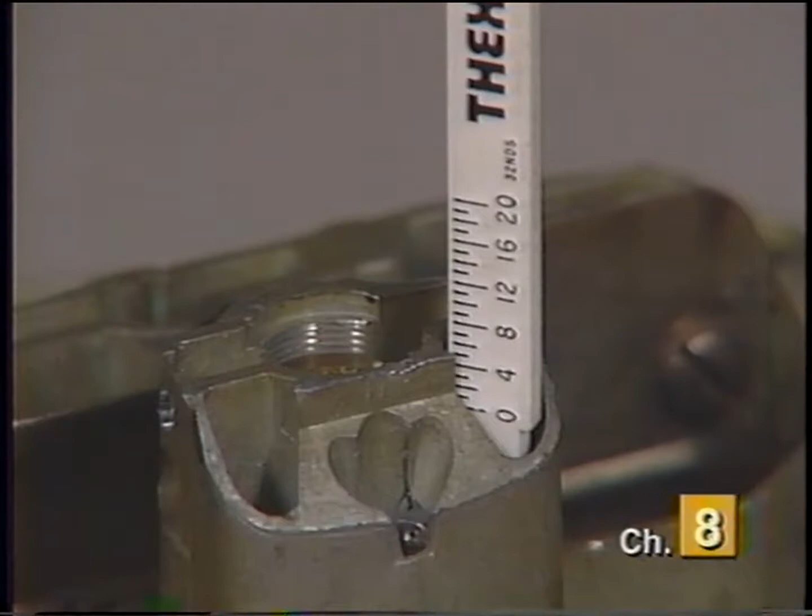Now place the float gauge from the adjusting kit into the D-shaped hole in the air horn. With light pressure, push down on the gauge to measure the amount of travel of the solenoid plunger. The correct amount of travel is 4/32 of an inch. If the amount of travel needs to be adjusted, use the tool from the gauge kit that fits the rich stop screw and turn the screw either up or down to achieve the correct amount of travel.

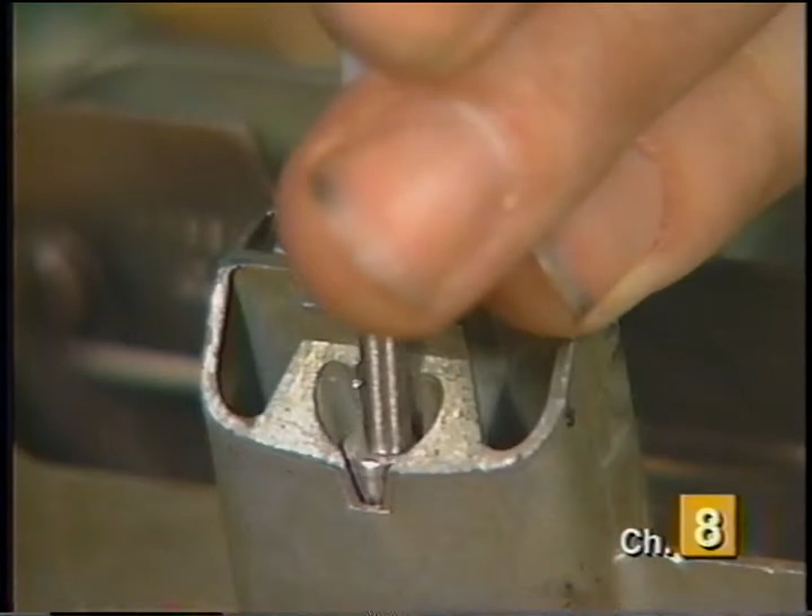When the adjustment is correct, reinstall the plug and use a drop or two of red Loctite to seal the plug back in place. This plug must be reinstalled to maintain the adjustment once back on the engine. Remove the float gauge and place the hook-shaped idle air valve gauge into the D-shaped hole. Position the hooked end of the tool over the top of the idle air bleed valve. Hold the gauge down lightly until the solenoid plunger bottoms against its stop.

Adjust the idle air bleed up or down until it just touches the bottom of the hooked end of the gauge. If you earlier found a letter stamped on the idle air bleed, you are done with that adjustment. If there wasn't a letter stamped on it, the final adjustment must be made with the engine running. Refer to a service manual for details of this procedure on your particular vehicle.

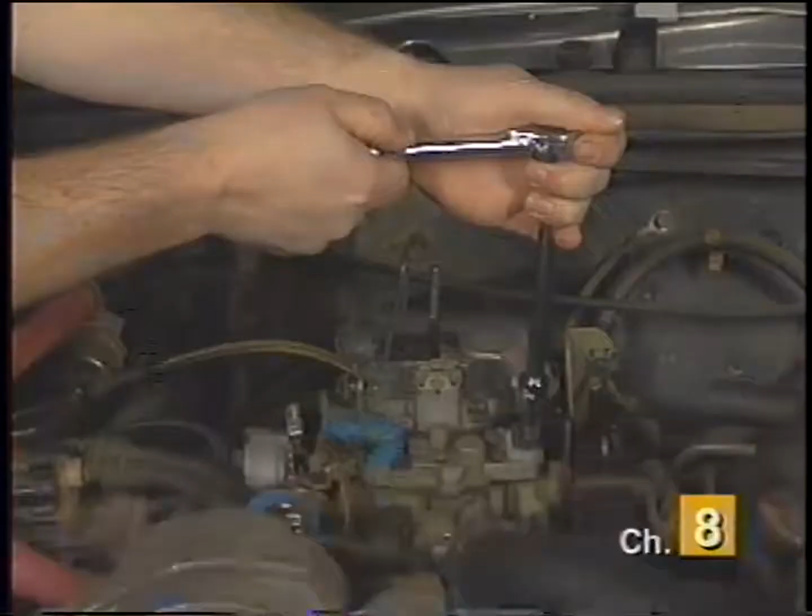Continue with reassembly by reconnecting the vacuum brake hose, and reassemble the accelerator pump lever to the pump rod in the same hole as previously used. With a screwdriver, push the pivot rod pin back into place. Next, reattach the choke rod to the lower lever inside the float bowl casting. Once connected on the lower end, reattach the upper end of the rod to the choke blade shaft using the retaining screw earlier removed. Reinstall the carburetor on the engine in the reverse order of removal.

With the carburetor reinstalled, reconnect any vacuum lines and electrical connectors earlier removed. Because most final adjustments have to be made without the air cleaner in place, plug any vacuum lines that may still be opened. Connect the positive lead of the digital volt ohm meter to the Kelly green wire connector. It is commonly located near the carburetor or passenger side strut tower. Connect the black lead from the meter to a good engine ground and set the meter to the 6-cylinder dwell scale.

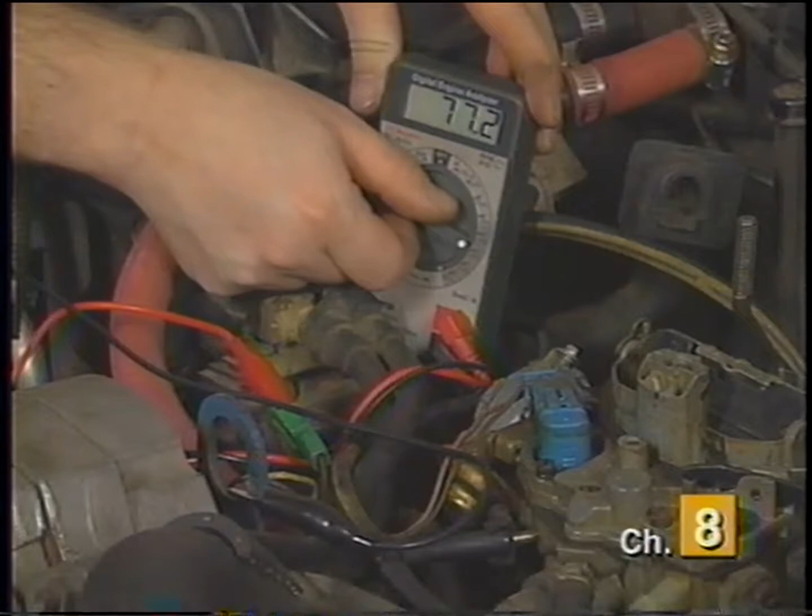Make sure the transmission is in park, or in the case of a standard transmission, neutral with the parking brake set. After making sure there are no wires or hoses in the way, start the engine and allow it to reach full operating temperature. Make sure you are standing off to the side of the vehicle and not in front of it whenever making adjustments with the engine running. After the engine is fully warmed up and idling, the dwell reading on the meter will begin to vary, indicating that the onboard computer is operating the MC solenoid.

On carburetors with no letter stamped on the idle air bleed, the dwell reading should fall between 25 and 35 degrees. Adjust the idle air bleed valve by turning it clockwise or counterclockwise until it is within that range, attempting to be as close to 30 degrees as possible. Perform this step carefully. Only make very slight adjustments, 1/8 of a turn or less at a time, as the idle air bleed is very sensitive.

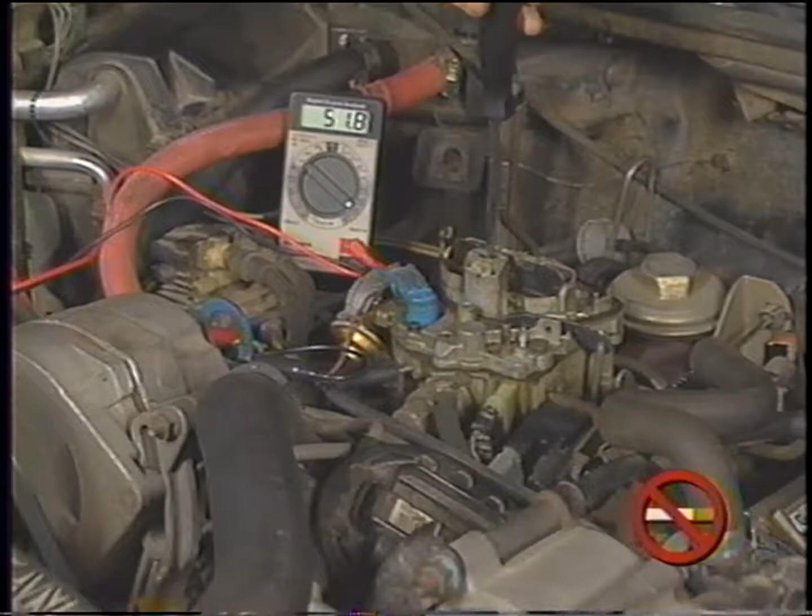If you cannot get the adjustment close to 30 degrees, and you earlier found a letter stamped on the idle air bleed valve, you will need to adjust the idle mixture screws at the base of the carburetor to bring the dwell reading within range. To do so, you will need to remove the caps that are covering the idle mixture adjustment screws. Follow the instructions detailed in a service manual, or a special plug remover tool can be used to simplify the procedure. With the plugs removed, you can access the idle mixture adjusting screws with a special tool as shown.

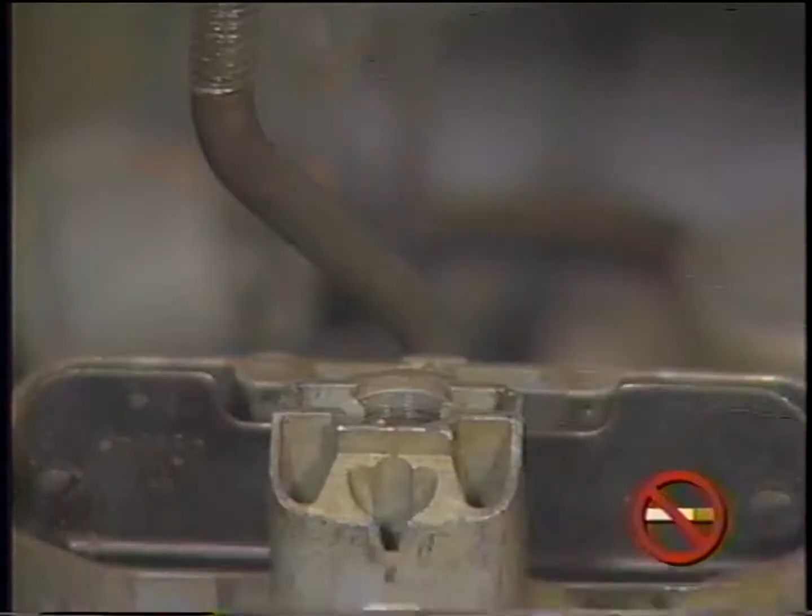Bring the mixture control dwell to within factory specifications. If the dwell reads low, adjust the screws out evenly to reach 30 degrees. If the dwell reads high, adjust the screws in evenly to reach 30 degrees. Final fine-tuning may have to be made once again by turning the idle air bleed valve. After all adjustments are complete, seal the idle mixture needle openings with a non-volatile, oxygen sensor-safe silicone sealer. Lastly, reconnect all vacuum hoses, reinstall the air cleaner, and test drive the vehicle for proper operation.

Now let's review the replacement and adjustment procedures on an internally mounted mixture control solenoid on a GM vehicle. Begin with the ignition switch in the off position. To avoid losing any small parts during this procedure, we suggest removing the carburetor from the engine before performing any of the disassembly steps. With the carburetor on the bench, proceed by removing the air horn. If the air horn gasket is damaged during this procedure, a new one can be obtained in a carburetor rebuilding kit. Remove the plastic filler block and carefully remove the metering rods.

Using the special mixture control solenoid adjusting tool, turn the lean stop all the way in while counting the number of turns. Record the number of turns, then remove the lean stop from the carburetor. Remove the electrical connector retaining screw and remove the solenoid and connector together as an assembly. Compare the new and old parts to be sure of correct replacement. Position the new solenoid and electrical connector in the carburetor and reinstall the electrical connector retaining screw.

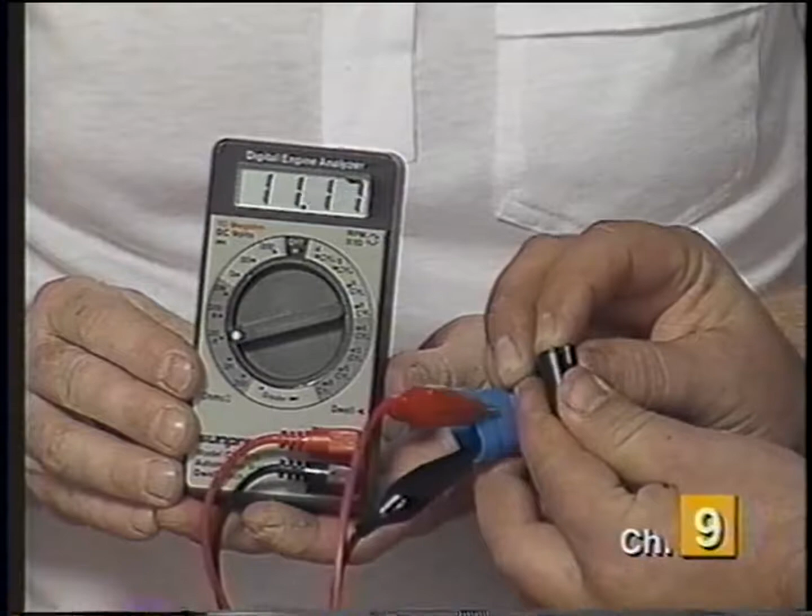You want to do that in both directions. Numbers will go up in one direction, back down in the other, and you want to do it relatively slow, because if you don't do it slowly, you could miss a bad spot in there. You're right, and the important thing is the numbers should follow what you're doing. Nice and slow progression, up and down or down and up. Okay, this one appears to be okay.

So we've checked our throttle position sensor. That is okay. We've still got our code 21. Now where do we go? Well, if that's the case, we know that there's something else wrong. So you can get into your manual such as this that talks about trouble codes and diagnostic trees, and we can actually find a diagnostic tree for code 21 and the throttle position sensor. So by following the step-by-step diagnostic tree, we're going to arrive at either a bad wire, a bad electrical connection, or maybe even a bad computer. But it's one of those things that's causing the problem on this vehicle.

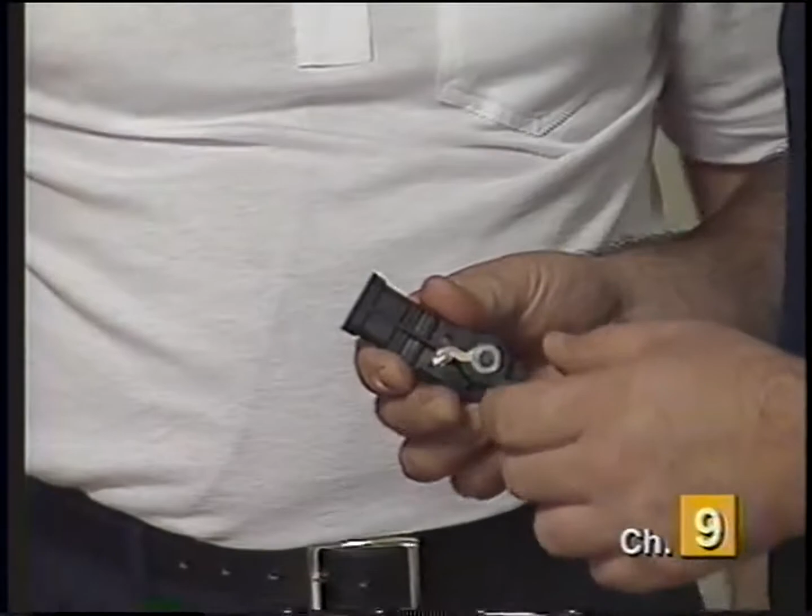Okay. Now, on the other hand, we've got another TPS here that we pulled off of a fuel-injected vehicle. Now, it looks a little bit different, but again, it's got our 3 terminal connectors on that. And why don't we run a test on this one, Jim, and see what we come up with here. Once again, the ohm meter can be left in the 20,000 range, and take one lead, stick it in the center as you're doing, okay, and then you're free to put that one in either of the other 2 you want. Okay. Let me see, I got her on there now. Good. And here we have a reading, so go ahead and operate it just as you did before, and we'll see how this one does.

And we're going up slowly along with my movement, and we'll see. There it is. There's our open circuit, and now look, our resistance is changing again. And we'll come up here, another open circuit. That's quite erratic, isn't it? Yeah, it sure is. So that's what's creating my bucking sensation when I'm trying to accelerate, and it's also giving me my check engine light, isn't it? That's right. This is a bad one, and this is what it looks like. See, the ohm meter is picking up all those bad spots in there.

So hence the reason that you do want to perform this test very slowly, because if you go too fast, you could zip right by those numbers and not actually even notice it at all. Right. Replacing this part would solve your problem. Sure, 2-minute test, you're down the road again.

Although there are many different styles of throttle position sensors, they can all be tested using the following procedure. Disconnect the electrical connection at the sensor. Set your ohmmeter to the 20K scale. Connect one of the ohmmeter leads to the center terminal and the other lead to one of the outer terminals. Polarity is not important. Slowly move the vehicle throttle through its entire range of movement.

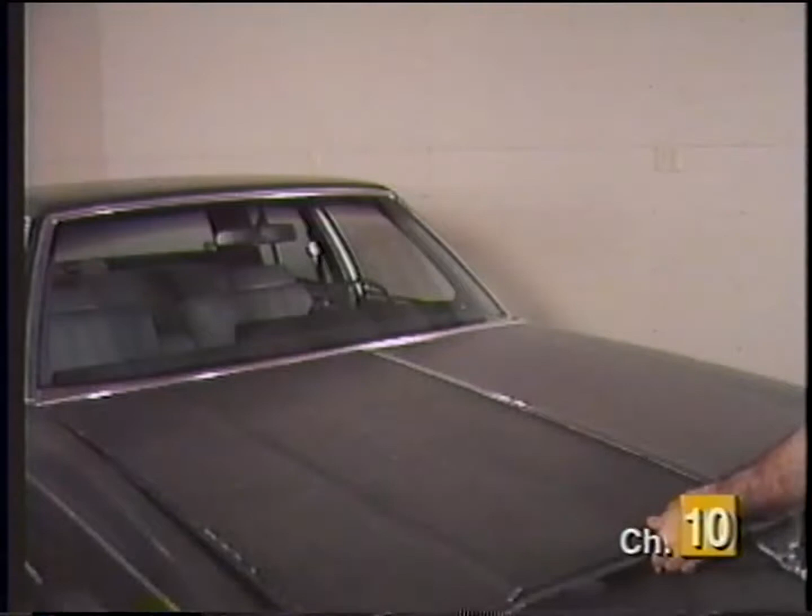Replacing the throttle position sensor, or TPS, on either carbureted or fuel-injected vehicles can be easy with the right tools and our help. There are several different styles of throttle position sensors in use today, but all will resemble one of the styles shown and will be replaced in a similar manner.

The tools needed to replace the throttle position sensor on a fuel-injected vehicle include one or more of the following: a set of screwdrivers, a 1/4-inch drive socket set, a set of small Torx bits, and a 10 megohm input digital volt ohm meter.

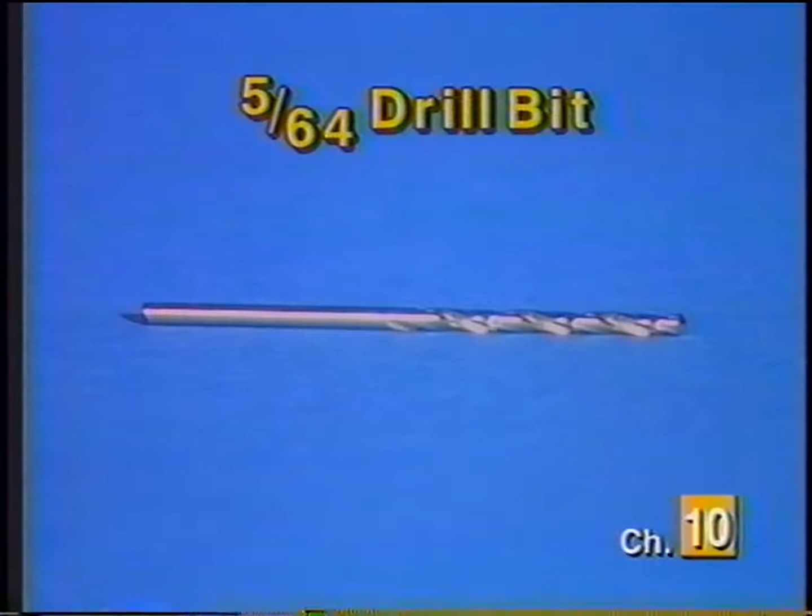In addition to those tools, you'll need the following to replace a TPS on a carbureted GM vehicle: a 3/32 drift punch, a hammer, a 5/64 drill bit, an electric drill, a number 8 sheet metal screw, a hex key wrench set, a tube of thread locker, a needle nose pliers, and a TPS adjusting tool.

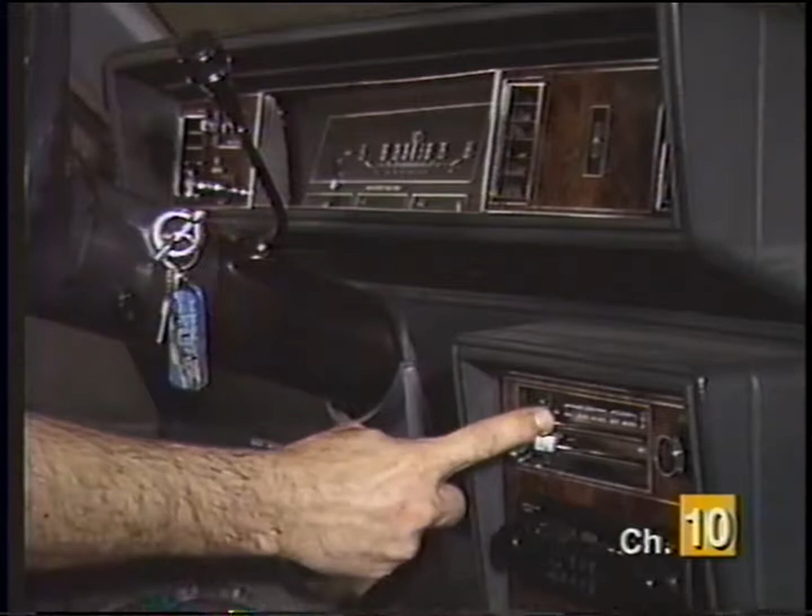To prevent getting burned and to make the job easier, always begin repairs on a cool engine. The first step whenever working on the electrical system is to turn off all electrical accessories, including the ignition key. The first type of TPS we will replace is on a carbureted GM vehicle. Remove the air cleaner assembly to gain access to the carburetor where the TPS is located.

Disconnect the MC solenoid and TPS electrical connectors from the carburetor. Disconnect the upper choke lever from the end of the choke shaft by removing the retaining screw. Remove the lever from the choke rod by rotating it until it disengages from the rod. Remove the choke rod from the lower lever inside the main body casting by holding the lower lever outwards with a small screwdriver and twisting the choke rod.

Using a 3/32 drift punch and hammer, drive the accelerator pump lever pivot pin inward until the end of the pin is against the air horn. Lay the pump lever off to the side and out of the way, and using a needle nose pliers, remove the TPS plunger. Using a needle nose pliers, remove the vacuum hose from the choke pull-off.

Now, remove the 2 front carburetor mounting bolts with a ratchet wrench and socket. Unscrew the center mounting stud for the air cleaner. Remove the air horn to main body screws. When removing the 2 countersunk screws located inside the air horn, use a magnetic screwdriver to prevent dropping them into the intake manifold. If you are uneasy about removing these screws with the carburetor on the engine, we suggest you stop here and remove the carburetor from the intake manifold before proceeding any farther.

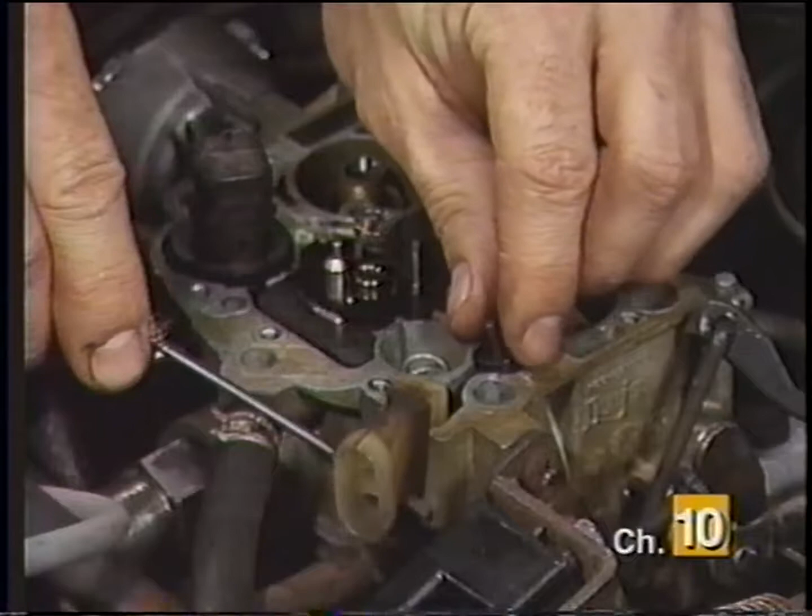Remove the air horn from the main body by lifting it straight up and off. Pushing up from the bottom with a small screwdriver on the electrical connector, remove the TPS assembly from the main body. Using a needle nose pliers, retrieve the spring from the TPS well. Compare the old TPS with the new one to be sure of the correct replacement. Install the new TPS spring.

Position the new TPS assembly into the carburetor main body. Be careful to align the groove in the electrical connector with the slot in the main body casting. Push down on the electrical connector and the sensor so the wires and the connector are below the main body casting surface. Reinstall the air horn gasket and air horn, holding down on the pump plunger assembly. To ease installation, insert a thin screwdriver between the air horn gasket and the main body to raise the TPS adjustment lever over the sensor.

Loosely install all the air horn screws. Tighten the screws evenly, working from the center outward in a crisscross pattern. Reinstall the two front carburetor mounting bolts and tighten them securely. Reinstall the air cleaner mounting stud and tighten it hand tight. Reconnect the vacuum hose for the choke pull-off.

Place the TPS plunger through the hole in the air horn and reposition the accelerator pump lever. Using a needle nose pliers or a small screwdriver between the pivot pin and the air horn, carefully pry the pivot pin back through the pump lever until it is flush with the housing. Using your hand, reinstall the choke rod into the lower choke lever by twisting slightly while holding the lever over with a small screwdriver. Install the upper choke lever back into the choke rod.

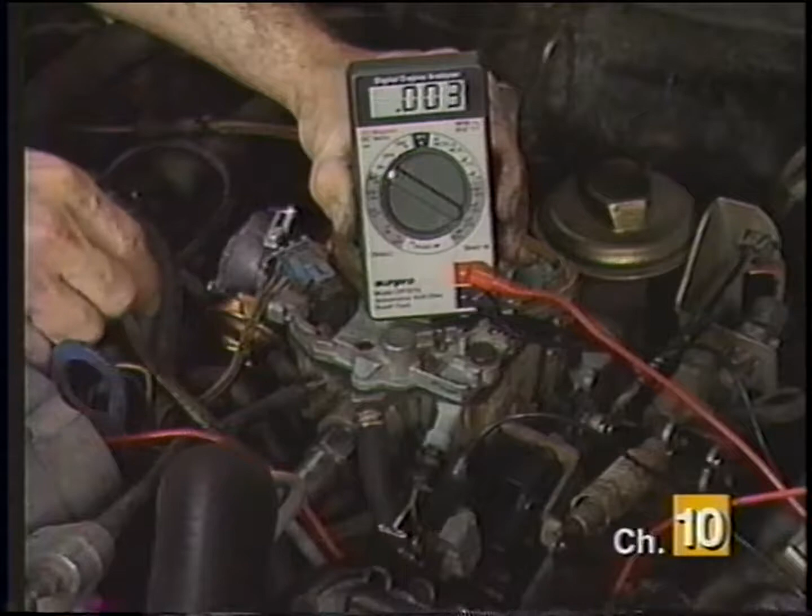In the appropriate service manual for your vehicle, or in the instructions included with the new throttle position sensor, locate the voltage specification. Then, back probe the center and lower terminals of the TPS connector as demonstrated. Set your voltmeter on the low voltage scale and connect the leads for your voltmeter to the back probe connectors. With the air conditioning off and the idle speed control plunger retracted, turn the ignition switch to the run position.

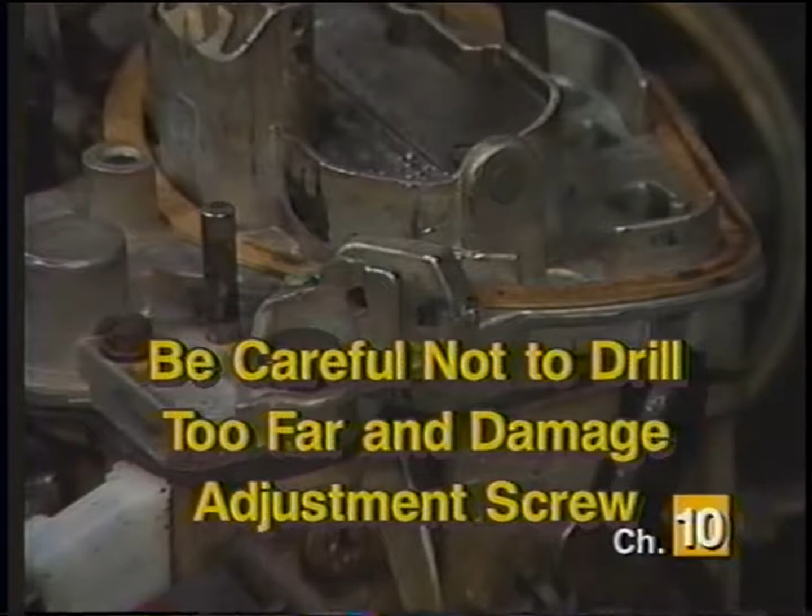Read the TPS voltage. Some vehicles, such as ours, will require it to be adjusted with the choke on the high step of the fast idle cam. If it is within specifications, you're done. If not, you must remove a small tamper-resistant plug that covers the TPS adjustment screw. To do so, drill a hole in the plug with a 5/64 drill bit. Be careful so as not to drill too far and damage the TPS adjustment screw.

Insert the number 8 sheet metal screw in the hole drilled. Using a pliers, pull on the screw to remove the plug. Use a special TPS adjustment tool to bring the voltage within specifications. On our vehicle, the specification is 0.97 volts on the high step of the fast idle cam.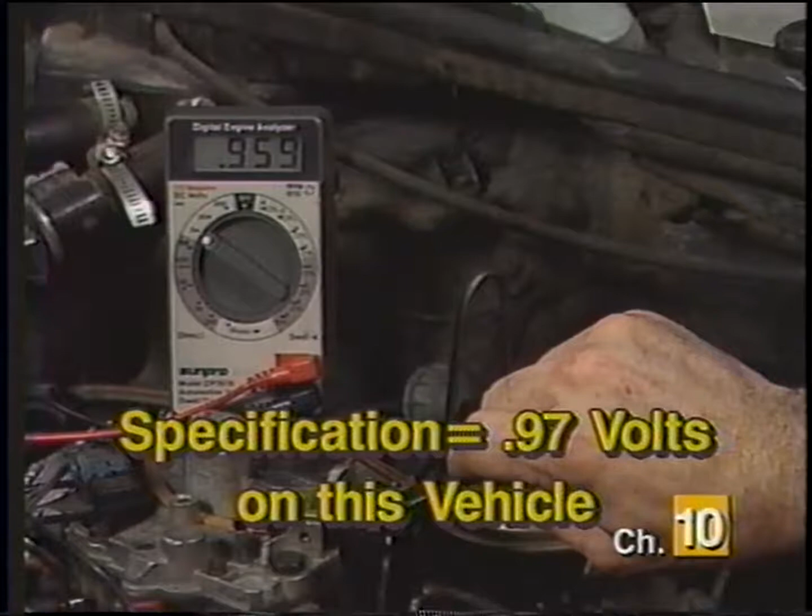Always make sure your final adjustment is made by turning the screw in a clockwise motion. Once adjusted, place a drop of thread locking compound in the adjustment hole and reinstall the new tamper-resistant plug supplied with the new TPS until it is flush with the boss on the carburetor. Remove your voltmeter and back probe pins and you're done.

To replace a throttle position sensor that is located in the carburetor, begin by turning off all the accessories including the ignition switch. Remove the air cleaner assembly. Disconnect the mixture control solenoid and throttle position sensor electrical leads. Disconnect and remove the choke linkage from the choke shaft. Remove the accelerator pump lever and linkage.

Next, remove the throttle position sensor plunger. Remove any vacuum lines connected to the top of the carburetor. Remove the front 2 mounting bolts. Now remove the air cleaner mounting stud. Using a magnetic screwdriver, remove all of the air horn screws. Carefully lift and remove the air horn from the carburetor.

Remove the old throttle position sensor and spring from the main body. Install the new throttle position sensor and spring into the carburetor. Install a new air horn gasket and reinstall the air horn. Start all of the air horn screws and tighten by following the tightening sequence found in a Haynes manual. Reinstall and tighten the 2 front mounting bolts. Thread the air cleaner stud back into the carburetor.

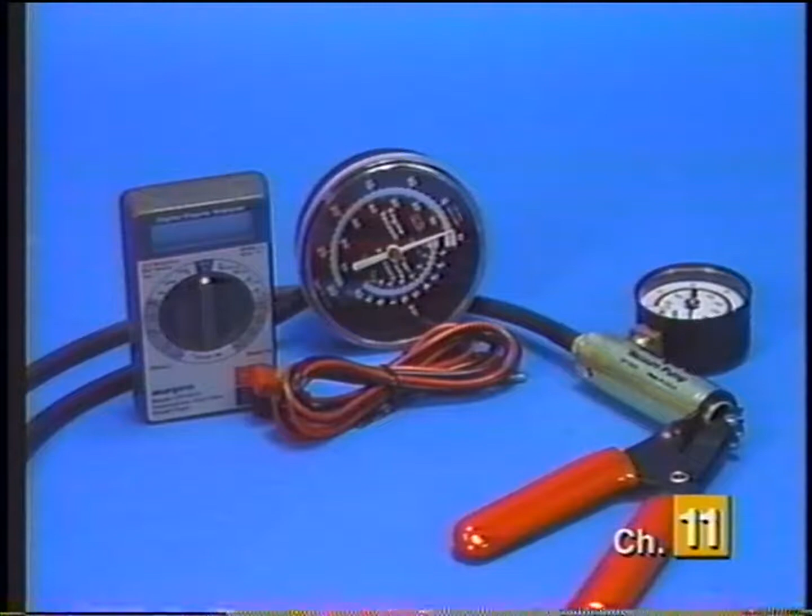A carburetor overhaul, or let's refer to it as a tune-up, isn't as difficult as many people think. The tools you will need to perform a typical carburetor tune-up include a 3/8 drive socket set, a set of combination wrenches, a set of screwdrivers, pliers including a standard and needle nose type, the correct size of flare nut wrench, usually 9/16 or 5/8, some masking tape and a marker, and for final adjustments, a hand vacuum pump, a vacuum gauge, and a tach/dwell meter.

For cleaning, we suggest having a can of aerosol carburetor spray, a bucket of carburetor cleaner to soak the parts in, and a source of air pressure for blowing out clogged passages. In addition to the new carb tune-up kit, we suggest installing a new float assembly, choke pull-off, and choke thermostat. Now is also a good time to install a clean fuel filter, air filter, and PCV valve to ensure maximum performance gains from your work.

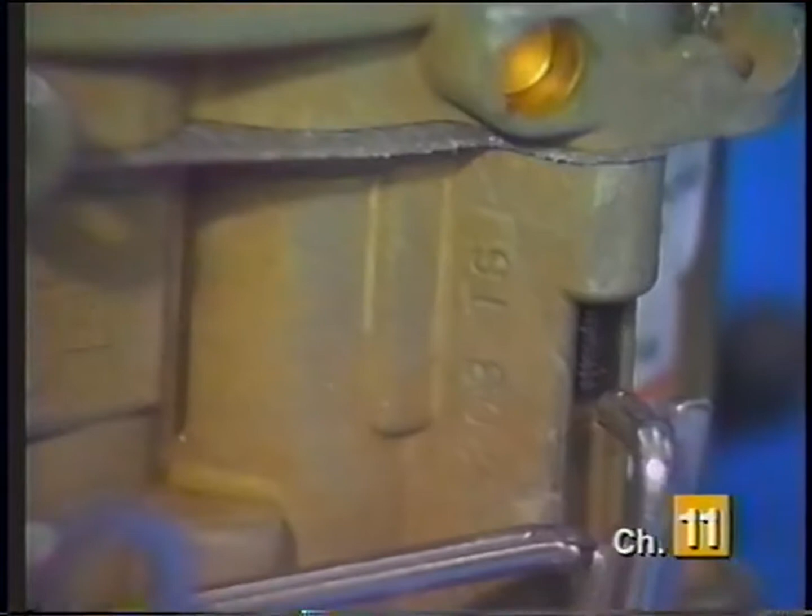When purchasing a carb kit, it is often helpful if you have the carburetor identification number or tag number with you. On Rochester carburetors, you can usually find this number on the main body section. On Holley carburetors, the ID number can be found on the air horn or main body section. On most Ford carburetors, it'll be located on a tag, and on Carter carburetors, you can find it on a tag or stamped into the main body section or base plate assembly.

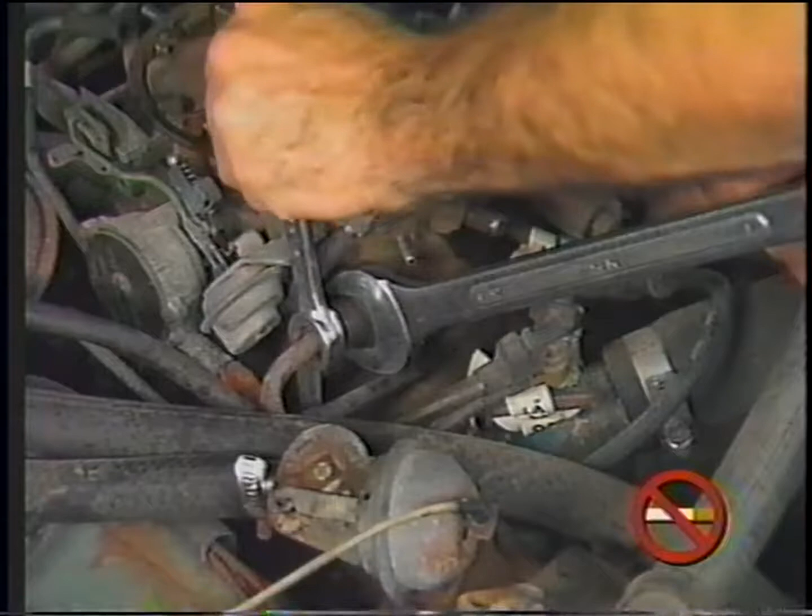The first step is to remove the air cleaner. Tag any vacuum lines or linkages with masking tape and a marker to ensure proper hookup during reassembly. Now's a good time to inspect any fuel lines or vacuum hoses and replace any that are brittle or cracked. Disconnect the fuel line from the carb. If it is a steel line, use the double wrench method, utilizing a flare nut wrench on the line fitting and a backup wrench on the carburetor fitting.

Now remove the carburetor mounting bolts. Usually there are 2 or 4 of them, and remove the carburetor from the intake manifold. Remove the carburetor base gasket and clean the carb mounting surface of the manifold. Disassembly should be performed in an orderly fashion. We recommend following the exploded view and parts numbering sheet included with your carb tune-up kit.

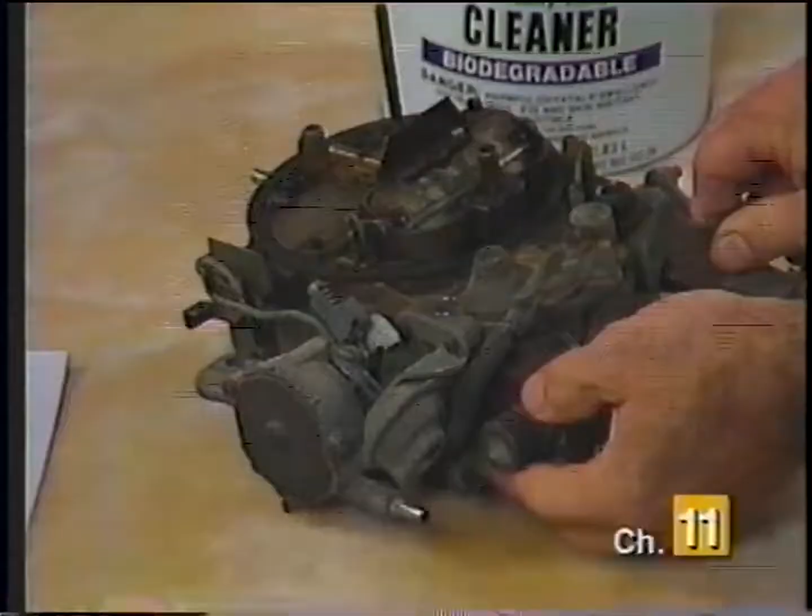In our example, we next remove the fuel filter inlet fitting and remove the fuel filter from its cavity. Be sure not to lose the small spring that positions the filter in its base. Next, we remove the idle stop solenoid, the choke pull-off, and the choke thermostat. Make sure to note the position of the choke thermostat before removing it.

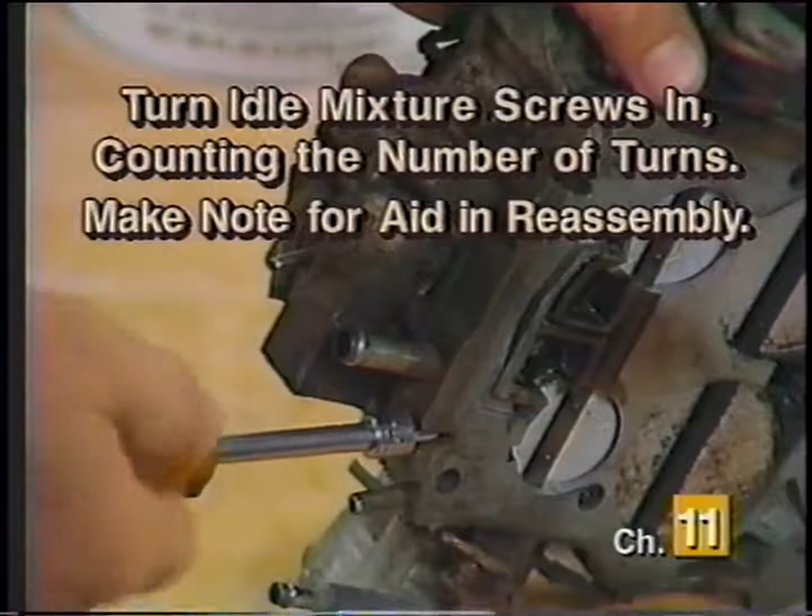Solenoids, dashpots, choke pull-offs, or thermostats should not be immersed in the carburetor solution. Clean these items as necessary with a cloth and spray carburetor cleaner. If so equipped, turn the idle mixture screws all the way in, counting the number of revolutions as you do so. Make note of how many revolutions so you can use that figure as a starting point during reassembly.

Next, remove the air horn screws and lightly tap on the air horn to loosen the seal of the gasket. Remove it from the main body. Remove the air horn gasket, but do not discard it at this time, as you will need it to match up to the new one later. Begin soaking parts in carburetor cleaner once removed.

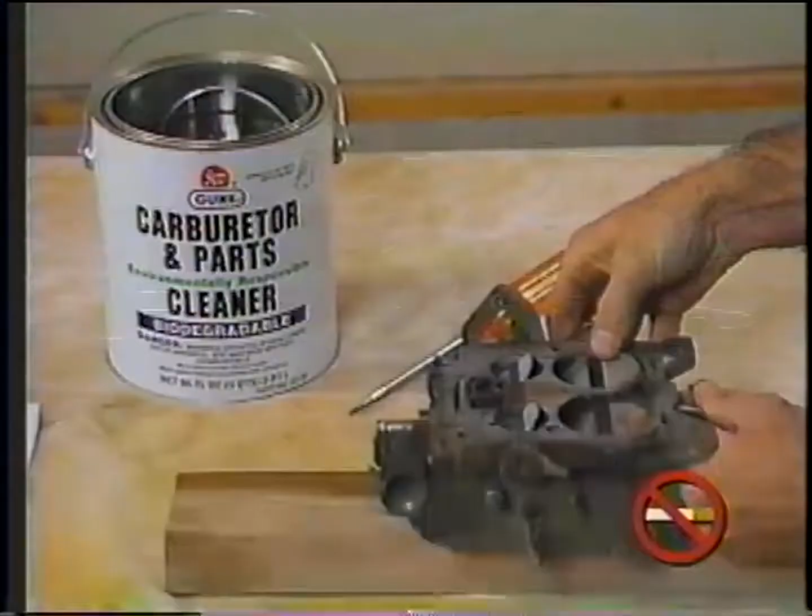In our example, we next remove the choke housing, the power valve or metering rods, and the needle and seat. During disassembly, be careful to note the location of any check balls, such as the accelerator pump check ball shown. Lastly, remove the base plate screws and separate the base plate from the main body.

Allow the parts to soak in the carburetor parts cleaner. Generally, about an hour will remove tarnish and foreign materials. Remember, do not soak any electrical, vacuum, or plastic parts in the cleaner. Drain all the parts into your container and blow dry with compressed air. This will not only dry off the parts, but also use the compressed air to blow out small passages to dislodge tarnish and foreign materials.

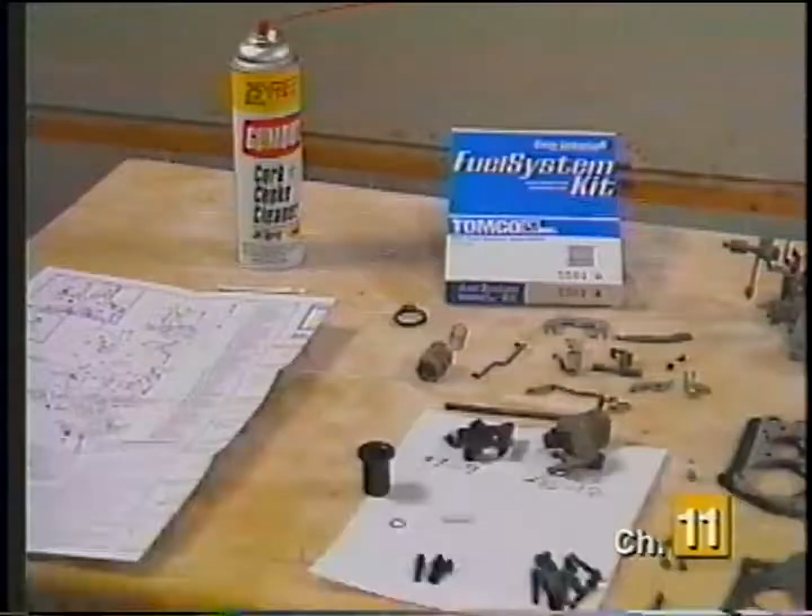If you don't have compressed air available, a less favorable method is to use an aerosol-type carb spray to clear passages. Because some carburetor tune-up kits come with additional gaskets, make sure to compare the new and old gaskets to assure correct replacement. With all the parts clean and laid out in order on your work surface, you are ready to begin reassembly. Begin by installing a new gasket between the main body and the base and tighten the screws accordingly. Reinstall any check balls that may have been removed earlier.

The new needle and seat assembly may appear slightly different than the one removed. Install it as per the instructions with your kit. Next, refer to the instruction sheet provided for the correct float adjustment procedure on your particular carburetor. Holding the new float in place, invert the carburetor and measure the distance between the top of the main body and the top of the float with the float gauge supplied.

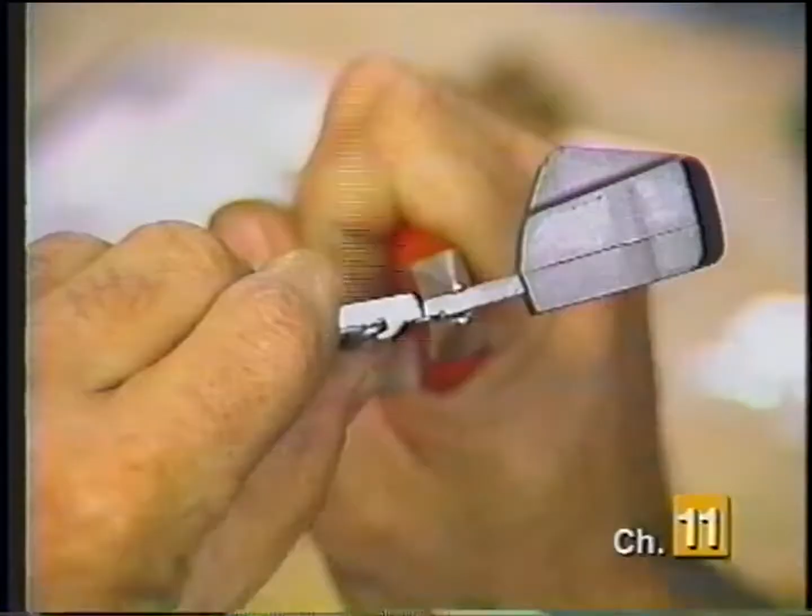If the adjustment is incorrect, gently adjust the float tab, reinstall it, and double-check the float level. Do not assume the float adjustment will be correct. Install the float retainer, reposition the metering rods, and install the choke housing.

In our example, we also had to install a new accelerator pump seal prior to reinstalling the accelerator pump in the main body. Carefully install the air horn and start all screws by hand to prevent cross-threading. Tighten all the screws evenly once installed. Install the new choke thermostat and adjust it as per the specifications detailed in the instructions.

If you removed them during disassembly, reinstall the secondary metering rods. Reinstall the idle mixture screws. Turn them all the way in and then back them out the same number of revolutions as counted when they were originally removed. Reinstall the choke pull-off and tighten the screws securely. Then reinstall the idle stop solenoid and the fuel filter, spring, and fitting. Be sure the open end of the fuel filter faces the fuel line.

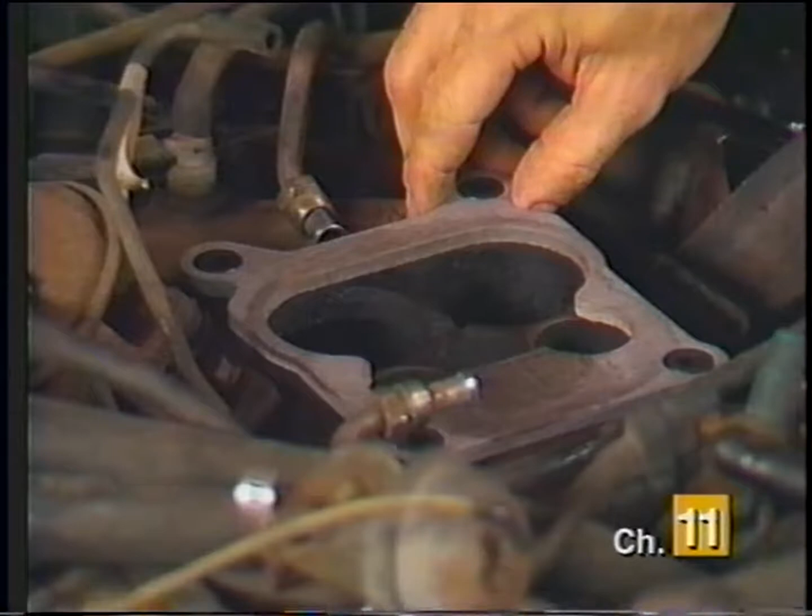Position the new base gasket on top of the intake manifold and install the carburetor on top of the gasket. To prevent cross-threading, start the mounting bolts in the threads by hand and tighten them securely. Next, tighten the fuel filter fitting. These usually take a 1-inch wrench, so be careful not to over-tighten it, as damage to the carburetor could result.

Using the same 1-inch wrench as a backup, use a flare nut wrench to tighten the fuel line. Sealer does not have to be used on these threads, as fuel lines are flared fittings. Reconnect any vacuum hoses, linkages, or wires leading to the carburetor. If you have installed a new choke pull-off, now is the time to use a hand vacuum pump to apply suction to the pull-off and check the opening adjustment of the choke blade.

As mentioned earlier, now is a good time to replace the PCV valve, breather element, and air filter. All that remains is to start the vehicle, check for leaks, and make minor idle mixture and idle speed adjustments. Idle mixture can be adjusted by using a vacuum gauge connected to a manifold vacuum port and adjusting them until you reach the highest mark.

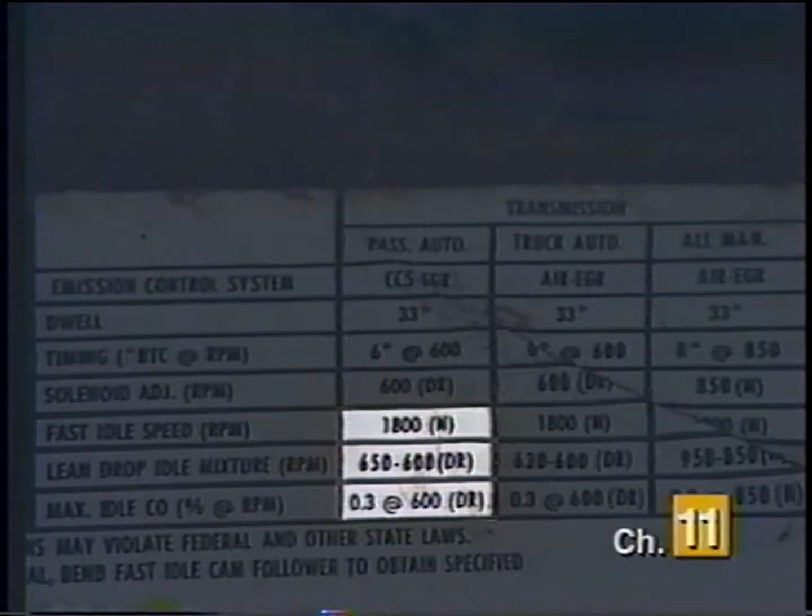Idle speed should be adjusted as per the specifications found in the underhood decal or from a service manual. Once adjusted, install the new breather element and air filter. Position the new air cleaner gasket on the top of the carburetor, install the air cleaner cover, and you're done.

Let's review the 5 easy steps for rebuilding your carburetor. Step 1. Removal and disassembly. First, remove the air cleaner. Tag the locations of all vacuum lines. Inspect the vacuum and fuel lines and replace any that show signs of deterioration. On steel lines, use the double wrench method and disconnect the fuel line from the carburetor.

Remember, no smoking during carburetor repairs and work in a well-ventilated area. Disconnect linkages, remove any mounting bolts, and remove the carburetor from the intake manifold. Remove the old carburetor mounting gasket and carefully clean the carburetor mounting surface. Disassemble the carburetor in an orderly fashion, laying all parts out on a clean work surface. Follow the exploded view and parts numbering sheet provided with your carburetor kit.

Before removing the idle mixture screws from the carburetor base, turn them in until they stop while counting the number of turns, and write down this number. Retain all gaskets to match up with the new ones for correct replacement. Step 2. Cleaning and inspection. Begin soaking all metal parts in a suitable carburetor cleaner solution. Do not, however, soak any electrical, vacuum, or plastic parts in the cleaner solution, as permanent damage will result.